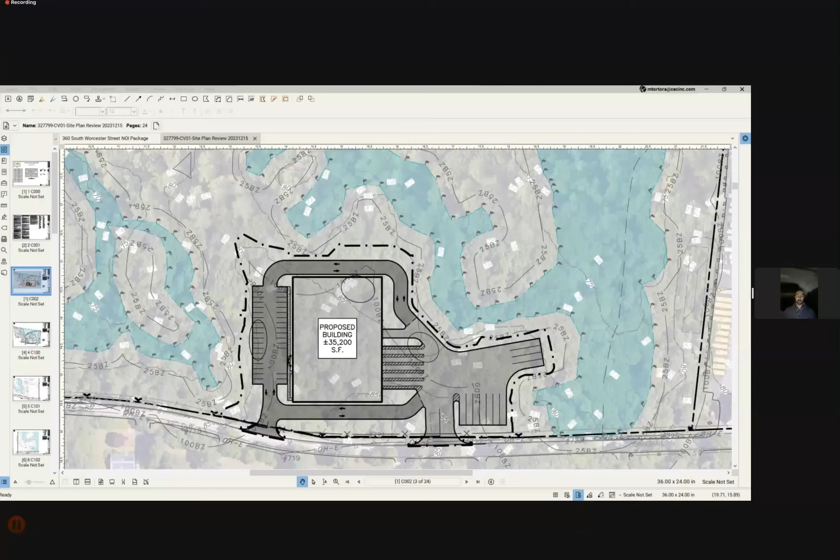The site is predominantly wooded, so there would be clearing associated with the potential development here. We will maintain minimum disturbance to the extent that we can by matching the grades around the edges and introducing retaining walls in some areas to minimize the impacts. So Mike, if we jump to the layout plans, it'll show a little more detail.

So maybe what you were alluding to, Mr. Chairman, earlier was the concept of splitting the project into two. It's really just a left and a right view that we have for each series of drawings to be able to show the detail at an appropriate scale. So again, it's really just one project.

From the western portion of the site, we have access for passenger car parking, which would serve as the front door for employees or visitors. So we have primarily passenger cars at the westerly entry, and we provided a circulation route around the building for fire access. Along some edges we've introduced retaining walls designed to minimize the grades. The parking meets the zoning criteria for number of spaces, and we have loading on the easterly side of the building.

On the easterly side of the building, we have a few loading docks. Along the back side, we have 5 depressed loading docks, and 1 at grade that we'd be able to pull into the building. There's also storage space for trailers as vehicles may not be in use or actively unloaded or loaded, with a wider entry suitable for larger trucks to enter at the east entrance. So the east side of the building is primarily reserved for the warehouse and larger vehicle use, while the west side is for passenger cars.

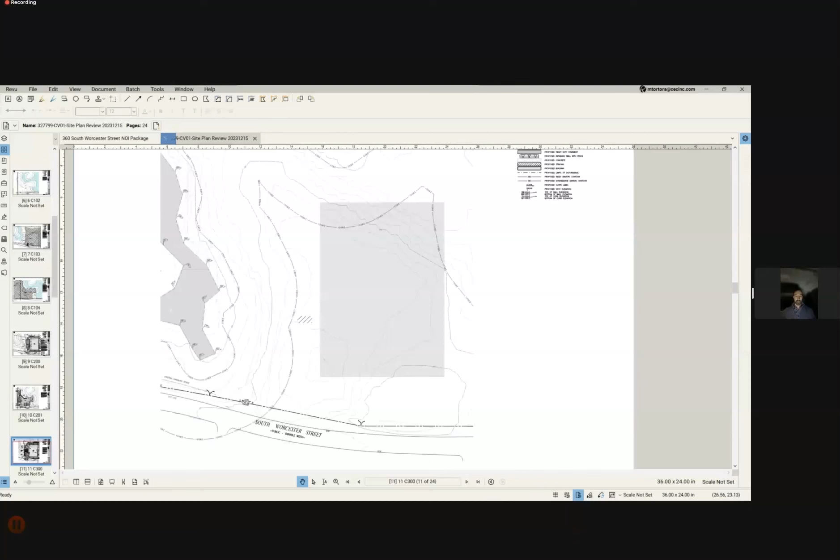This one is the grading and drainage plan. Prior to preparing the plans, we had a pre-meeting with the town, the various departments, as well as some preliminary soil evaluation work. We performed 11 test pits in January of 2023 by a licensed soil evaluator, witnessed by the Board of Health and the conservation agent. Generally, the groundwater was fairly deep, and the soils were very conducive for both septic and stormwater infiltration—it's a sandier material, so it worked well for the stormwater management system design.

What we're proposing is to pick up the pavement areas with deep sump hooded catch basins, route them through water quality units, and then to subsurface stormwater chamber systems where the stormwater will be treated and infiltrated back into the ground. We have one system on the west side of the property and one on the east side as well. The approach was influenced by conversations at the department heads meeting, where it was recommended that subsurface chambers are preferred over open basins to assist with future maintenance, and they perform better in the opinion of the town's conservation agent. We entertained that and approached the design with it in mind.

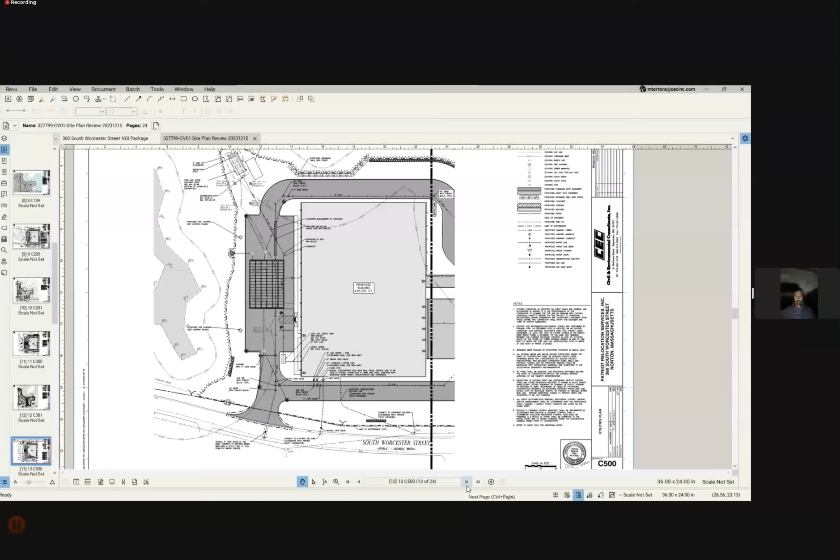Same thing for the utilities here. If we go to the next page, please, for the landscaping. I'll finish on the landscaping here and then open it up to any questions that you may have.

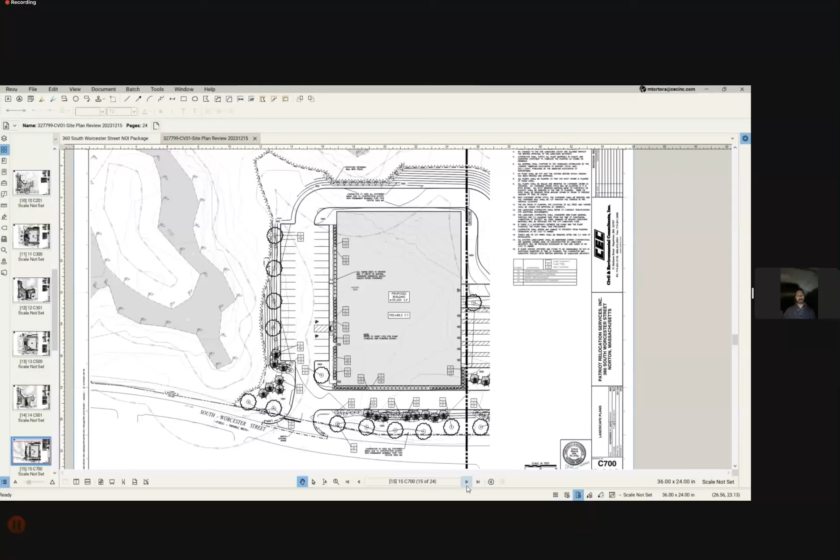The landscaping for the project introduces a fairly dense vegetated buffer along the frontage, so we want to make sure the building is screened from the roadway. We understand the neighborhood and context of where the building is proposed, so we're introducing a mix of evergreen and deciduous trees along the frontage, as well as keeping a robust landscape strip to set the building back and provide a visual buffer from the street. We're also providing landscape screening around the perimeter and within the building to help with curb appeal and additional screening around the parking and loading areas.

If you go to the next page, that'll be the landscape plan for the proposed loading areas. Again, we're introducing a mix of evergreen and deciduous trees to provide year-round visual buffer from the street to the proposed use.

The next page has some lighting plans as well. If you're interested in reviewing those, it's going to meet minimum standards for lighting, for safety and accessibility, through a mix of street lighting, individual poles, and building-mounted lighting around the perimeter, providing a safe environment during evening hours.

We appreciate any comments you may have. We believe we've designed the project to respect the no-disturb buffers, as well as meeting Wetlands Protection Act guidelines. We do have preliminary comments from the conservation agent. I understand that will be part of the process, and we welcome working with the town as we go through the review. Thank you for your time.

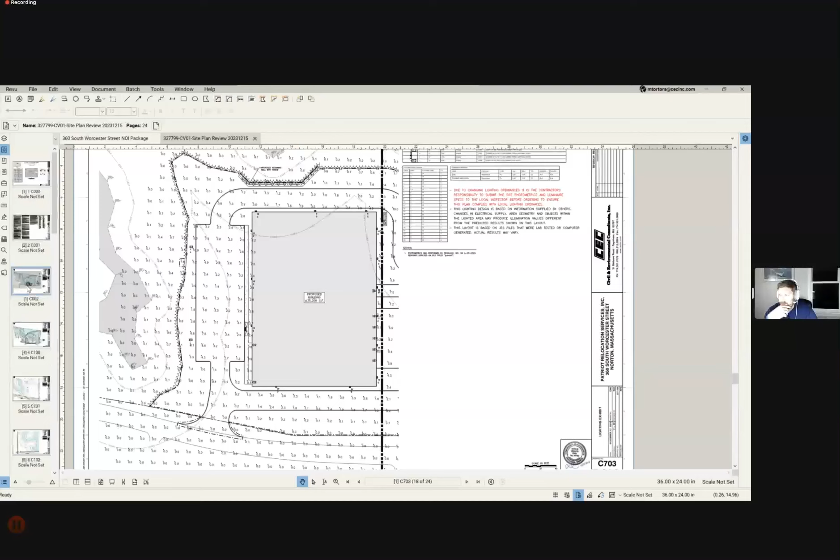Just to add on to that, we have contacted a peer reviewer and contracted with one to do the peer review for the stormwater. That's going to be under conservation. For the general public here this evening for this project, please note that any questions you may have should be in line with environmental, conservation, and stormwater related topics. Any questions on lighting, traffic, screening, and things of that nature dealing with the planning board, we ask that you reserve those for the planning board meeting, which I believe is tomorrow. Thank you.

All right, so conservation member questions? I have a few, Julie.

You can scroll to the top of this plan for the Wading River. So you said it was relocated - where did the information from here come from then if it was relocated? The delineations here are based on a delineation done by the wetlands consultant, about 3 years ago. It was flagged at that time as the former Wading River, so it wasn't identified as having a riverfront. All the FEMA maps and information we have to date appear to indicate that the actual river itself was essentially cut off at the railroad tracks and shifted north of the tracks. So verifying that would be part of the scope the wetland consultant will be doing.

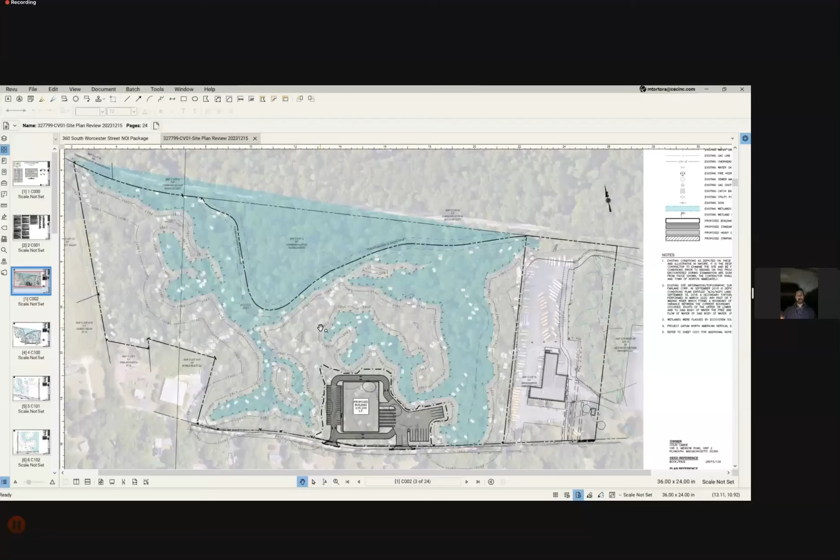So according to FEMA, is there any flood zone mapped on the site? There is, it's a Zone X. There's a Zone A and a floodway that's actually mapped following the railroad tracks north of the tracks. So in the lower portions of the site, it's a Zone X, which is the 500-year floodplain. So there's no 100-year flood zone on the property? There is not, no.

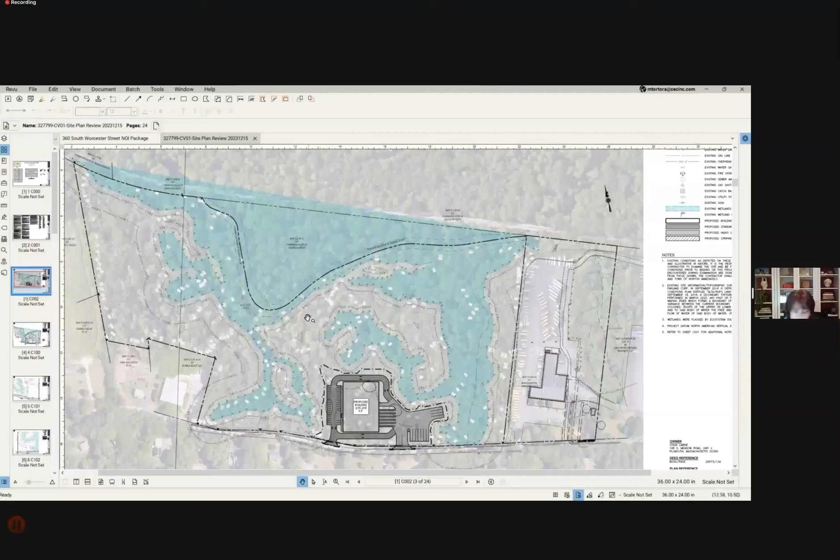So my next question is, if you can go to the grading plan, I could not tell the difference between the grading and where you're going to put those retaining walls. Can you outline where the walls are going and what they're made out of?

Sure, while Mike's highlighting where those walls are, we would typically build those out of a modular block system, Redi-Rock walls, essentially a gravity wall, as they're often referred to. It's essentially just stacked blocks. Sometimes they have a geogrid behind them that keeps them in place. Sometimes the blocks are of sufficient weight that they essentially hold the earth back based on the weight of the blocks.

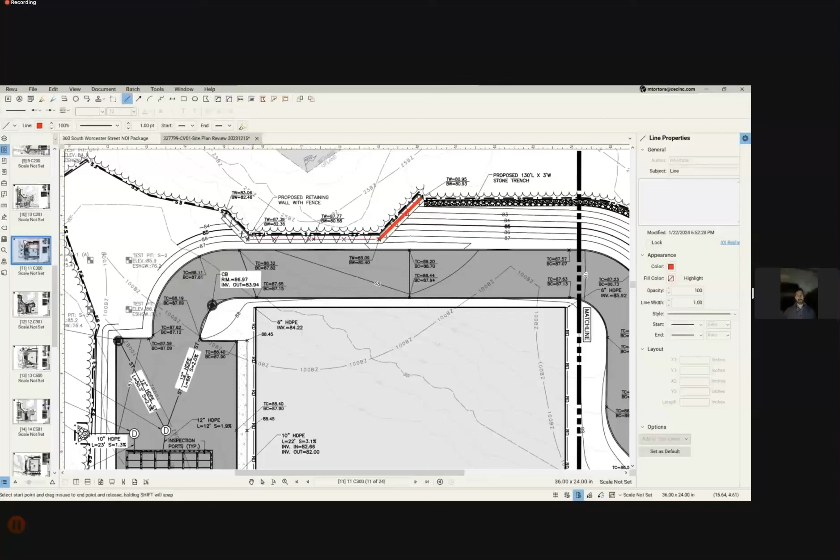So is the top of the wall shown, or is the toe of the wall shown once you get down at that angle, whatever that is, 3-to-1, whatever that wall block is? Are you showing that true to scale so we can tell? Do you need room behind the wall to construct it? Do you need access back there, a work zone behind it?

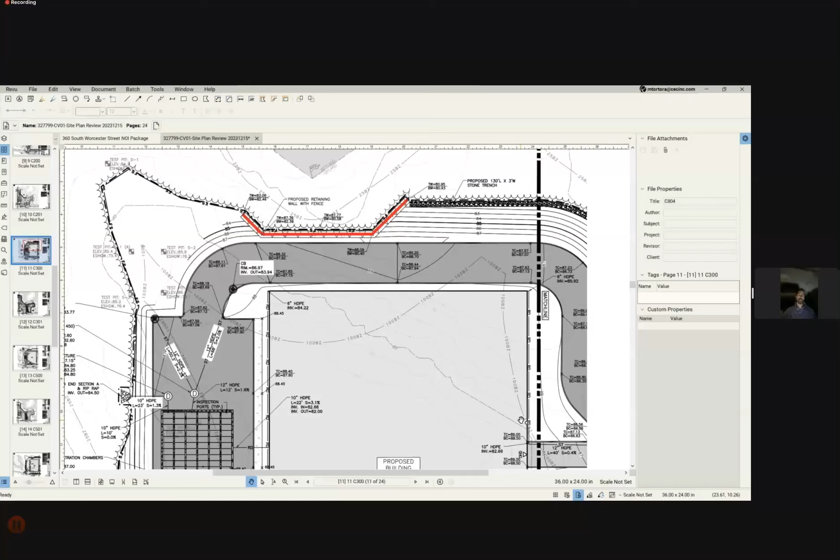Yeah, that's a fair question. We show the walls with a thickness that represents the actual size of the blocks. So we show the toe of the wall, and draw it with a thickness that represents generally what we believe the blocks will be based on the information we have. In this case, around the perimeter of the site, it's all lower than the site, so you would build up from the toe, so you don't have to extend past that toe to build it back or have any temporary excavations. So the front edge of the wall really represents the limit of disturbance for the project, because you just stack them up and fill in behind the wall as you're building it.

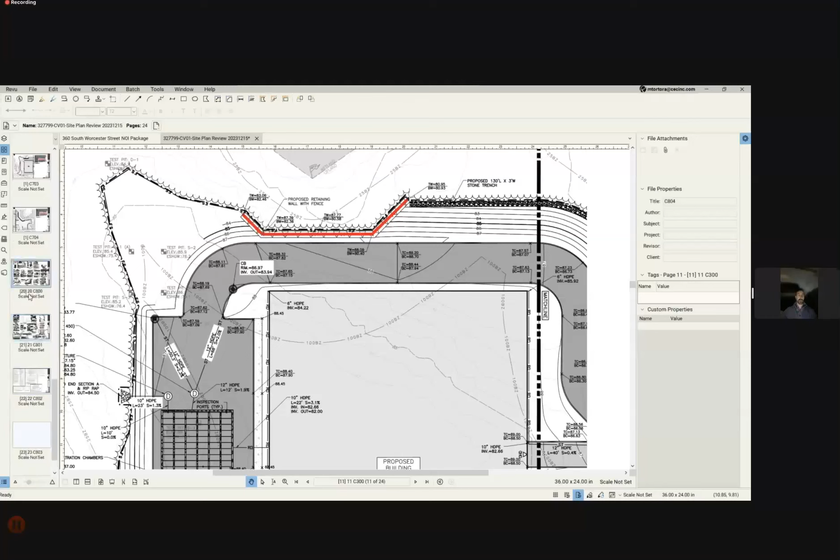Is there a detail of that wall? There is, yep. Mike, if you jump to that page, you could show the detail quickly. So is this the only segment of wall? No, there's I think maybe 3 portions of the site that have a retaining wall. All right, let's look at the detail first and then go back to the plan view and take a peek at where that wall is.

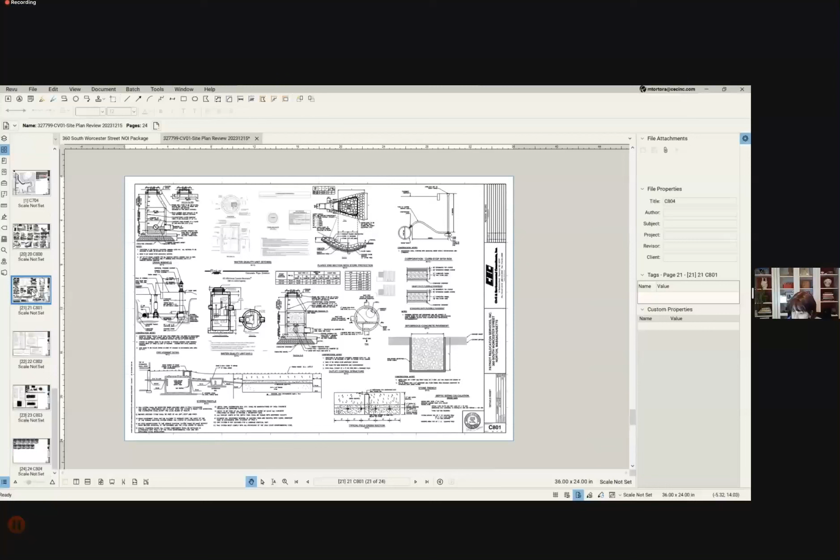If you're not seeing that detail, Mike, we'll make sure to add that to the plans if it's not in there currently. I'm not going to know how to build it if you don't have a detail.

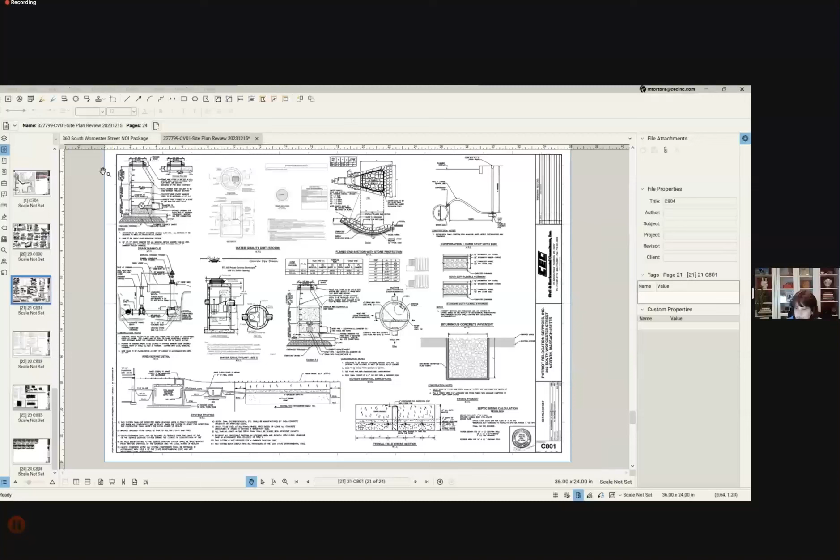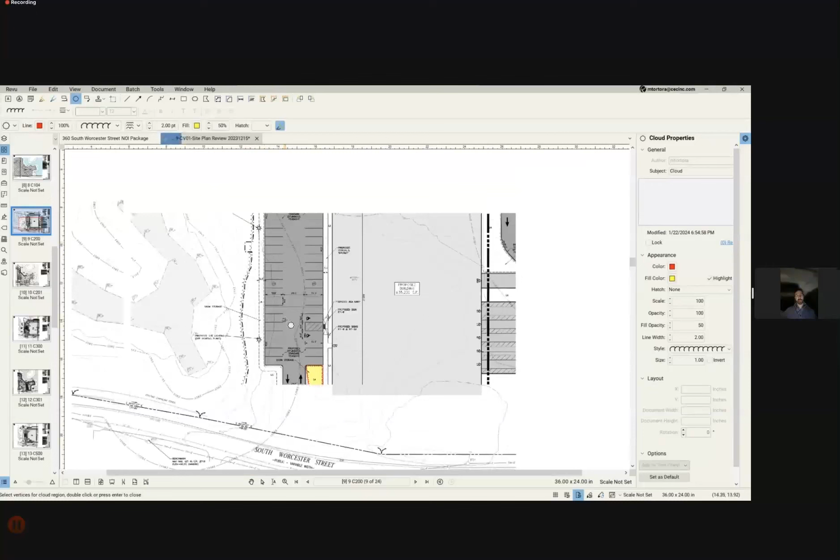The next question I had on the grading and drainage plan is where your snow storage areas are going to be. Sure, I believe we show that on the layout plans. So we do have perimeter snow storage areas identified on the plans, along the edges, so it wouldn't impact the available parking or the circulation for fire access or for the loading for the site. So we do have some snow storage areas identified on the plans.

Okay, and on the other side of the trucks, do they, is that going to be enough space considering the length of that plow run? Yeah, it ultimately can be. It's really dependent on how it's being managed, and there's also space on the pavement. Should we not want to plow and clear the entire paved area, I think there's enough space on the site to have some of that storage area within the pavement also available for snow storage if we need to.

Okay, I see the remainder of the wall is on this side. Okay, yep. And then where do you have any dumpsters outside? We do not. That's a good point. We'll certainly work in the storage within the site. They wouldn't be a large user, so we'll find a space for external dumpsters. Those would be fully enclosed and screened, so we'll add that to the plan set. Thank you.

That's all, thank you.

So you're saying that the usage of this building is strictly manufactured goods and then redistribution, there's no manufacturing that's going to happen here? Correct, we're not proposing that as it is today. The original use intended by the applicant, he owns a moving company, so the idea would be to have a temporary place to store some of that material they have from the moving. So no manufacturing, no processing, it's really just a warehouse use.

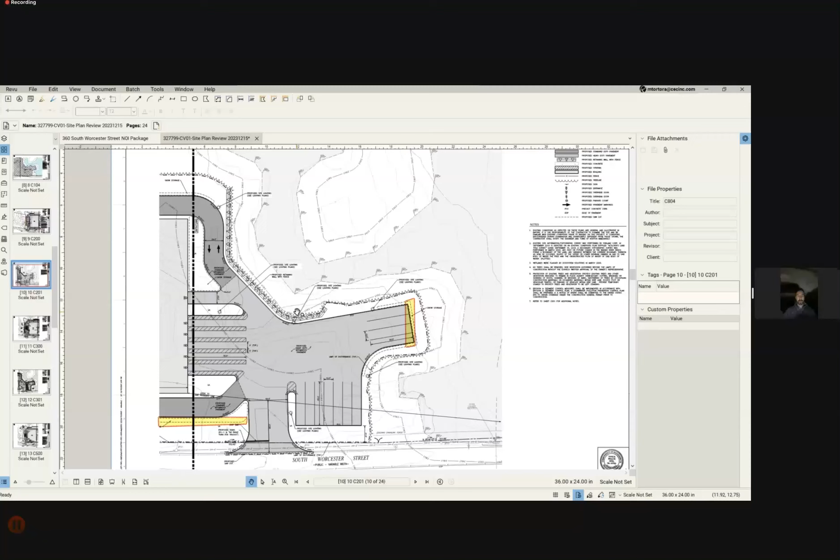If we don't have anyone on the commission - Julian, I just had one quick question. Just hoping you could clarify something you said at the beginning. I understand there was a request to have a couple of the flags redone. I think I read on the plans that the original flagging was done in March of 2020. Is that correct? To be honest, because I'm not at my desk right now, I don't have the dates in front of me.

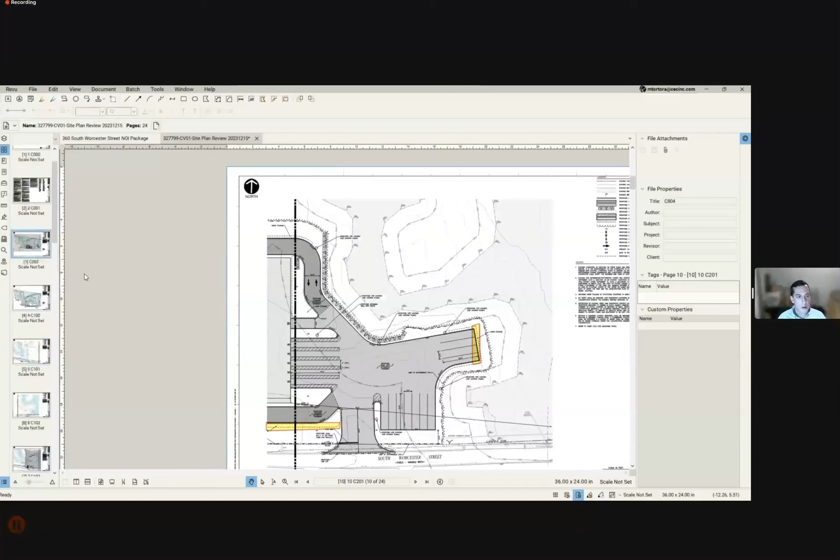Okay, someone can correct me if I'm wrong, but I believe I read that somewhere. And then I was hoping you could draw our attention to which of the flags were going to be redone. I'm assuming it's not all of them. Yeah, that was kind of my thought process - to just refresh the flags within the project work area. Because refreshing all of them for the whole entire site is going to be an extensive task, especially this time of year. So they can show those areas as approximate, but just refresh the flags within proximity to the work area. This is only a notice of intent, not an ANRAD, so they're not trying to confirm the resource areas on the whole site, just within proximity to their project. Gotcha, yep, thanks.

All right, I think we can potentially open questions up to anyone on the meeting who wants to ask a question about the project. You can do that either by introducing yourself or raising a hand by going to the reactions button. But if we don't have any questions, there's still a lot more information to come forth.

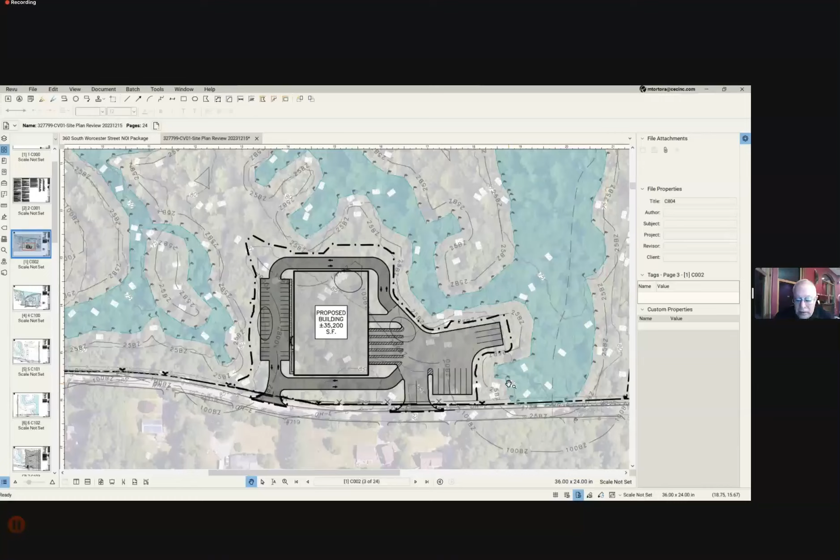Particularly with the stormwater review that is still pending, this would need to come up for a continuation, and our next meeting is February 12th. So we can consider a motion for continuation unless there's something more we need to detail tonight.

I'll make that motion. Second. So we have a motion made by Tama and seconded by Lisa for continuation of this hearing until February 12th, and we'll have some more information at that time.

So again, roll call vote. We'll begin with Lisa and Paxton. Aye. Lisa, I didn't hear your audible, but it looked like you said aye. Sorry, yeah, aye. Okay, and then we have Mark and Tama, aye. And Dan, aye. And I'll throw in an aye, so the motion carries.

So we'll see you guys in February.

Before you leave, may I just ask a quick question? I know Redi-Rock is a specific kind of gravity wall. Do you have any others in mind, or just gravity wall generally? Just gravity wall - we're not beholden to any one particular manufacturer, so we're open to the best manufacturer, the best material for the proposed use. Okay, thank you. Yep, that's all.

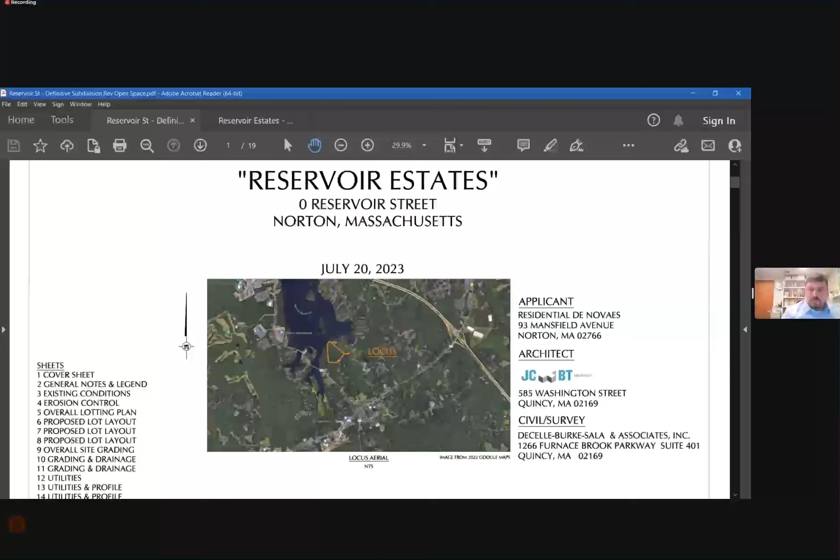So here's the existing site at Zero Reservoir Street, map 9, parcel 223. There's no development on it at the moment, so it has no real address. It has 588 feet of frontage along Reservoir at the front, and about 320 feet of frontage on the Norton Reservoir at the rear. It's relatively flat in the front portion of the site, and it creeps up to a knob of ledge and then starts to slope back down to the reservoir at the rear.

There's some passive walking trails on the site. It's a young forest. There's about 1.8 acres of wetlands, bordering vegetated wetland on the west side, a potential vernal pool that slightly clips onto the site, and then a bordering vegetated wetland at the rear along the Norton Reservoir, and another wetland at the front right of the site to the east.

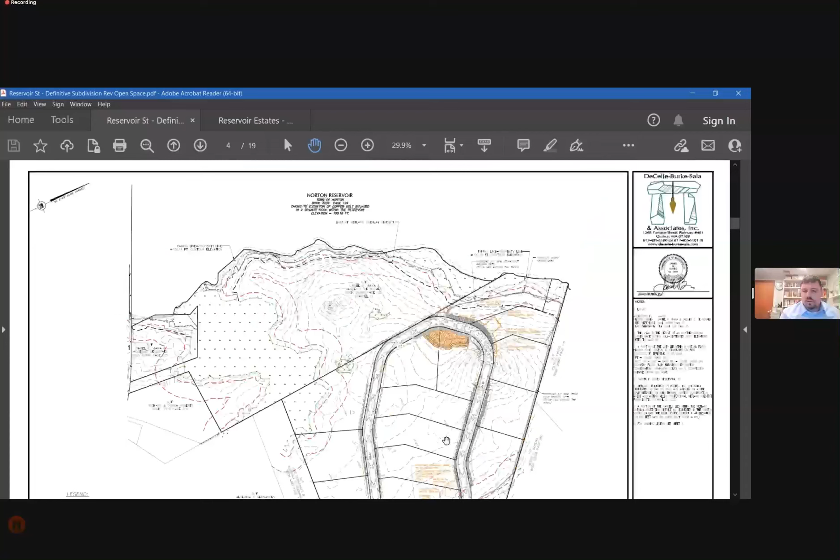As Ned said, we were approved for a 14-lot subdivision through the Norton Planning Board, and we're looking to permit the construction of the roadway for this subdivision. I can get in.

So here's the grading. There's two entrances on Reservoir Street, and it loops around the site. It's about 2,600 feet of roadway, 26-foot wide pavement with 5-foot sidewalks on either side, and the grading is made to match the site as best possible, and then it slopes off the edges to meet back up with the lots at a 3-to-1 slope.

We have this portion which crosses into the 100-foot buffer at the front right of the site. As you can see, I can zoom in. This dark black line that comes through here is a retaining wall to keep the grading from encroaching onto the 25-foot buffer. And this light gray line is the proposed public easement walking path that we have with the conservation restriction that we presented a little while ago.

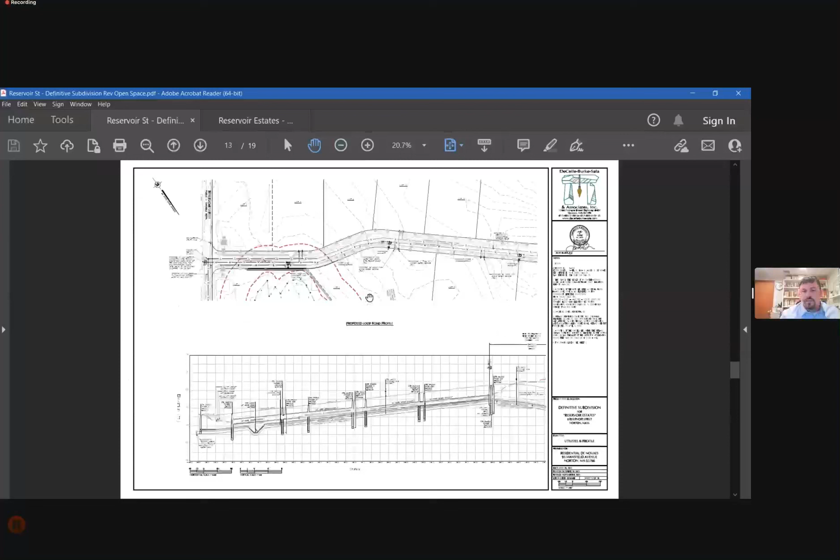Zoom out. I have a bunch of views of the new utilities. Essentially, there's going to be a new 8-inch water line looped through the road, a 2-inch force line sewer. All of the lots will have their own small grinder pump that'll pump into the force line sewer that'll meet a gravity line in Reservoir Street.

We're currently working with the Norton Water and Sewer Commission on permitting; we have to bring a sewer line 1,300 feet up Reservoir Street. It is a gravity line, and they're currently peer reviewing the work also. There will be electric line throughout, street trees placed every 40 or so feet, and light poles placed, I believe every couple hundred feet, and they're dark sky compliant light poles.

So the majority of the wetland disturbance, buffer zone disturbance, is at the front right of the site where the roadway crosses through the 100-foot buffer, and there's a retaining wall that keeps it from going into the 25. And then at the rear, there's some minor grading into the 100-foot buffer for the reservoir.

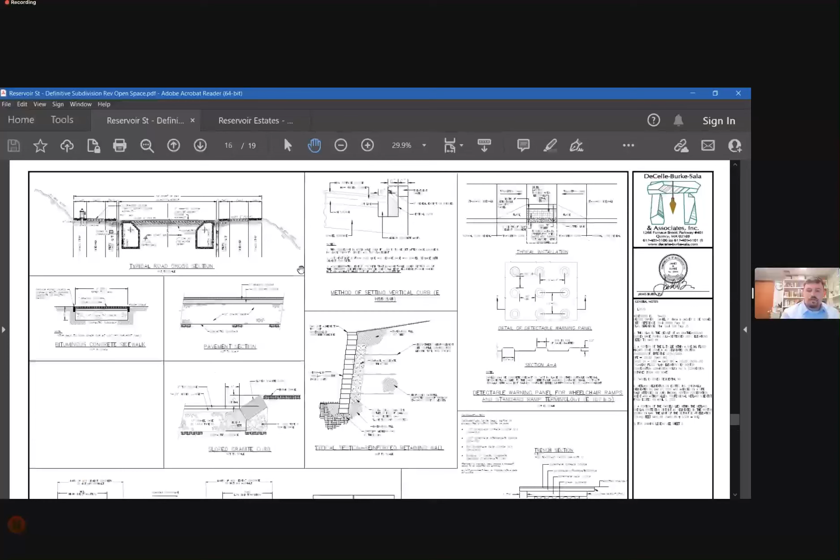There's also a wetland here, and the grading for the roadway does not encroach into this area. We're outside of the 100-foot buffer. If it were a certified vernal pool, we'd try to remain outside the 100-foot with any disturbance.

And at that, I'd like to open it up to the commission for any questions.

Yeah, I need some clarification. Maybe you can help me with this, John. Right now the stormwater is being reviewed with regard to the drainage from the road. That's the limit of it now, is that correct? From the road that they're proposing, the loop road that they're proposing?

Correct. And part two of the question is, will the impervious surface associated with the houses and the driveways of the houses also have to meet stormwater standards? Yes, that's part of it.

So for instance, right now, it's a two-phase project as I look at it: the road is coming in, so they've got the stormwater permit, which they're getting basically through this notice of intent for the roadway. But then each lot, depending on the size and scale of it, will need to meet the stormwater provisions. Since it's a 14-lot subdivision, the whole thing is going to have to have its own separate stormwater permit under our local regs.

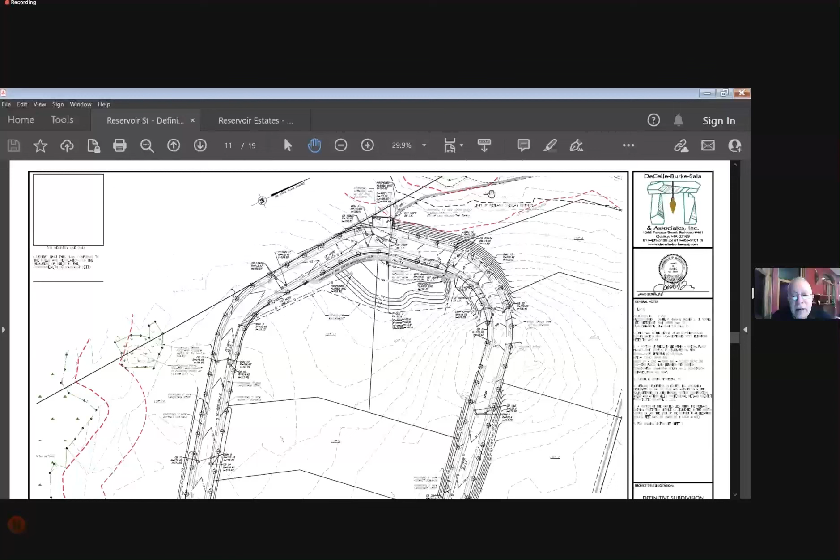Let me ask, where is that release going to occur? Can you show me on the plan? There's one for the rear detention right here. Okay, and where does it go? It'll flow overland to Norton Reservoir. All right, but I'm more concerned about your structure in the front.

Zoom in on it. Yeah, the last thing we want is to flood out Reservoir Street, or a neighbor. So I'd say keep any sort of excess flows away from Reservoir Street or any neighbors to the east and west. This gets culverted to the bordering vegetated wetland here, and with the study we've done, it decreases the peak flow that goes to it now.

Right, but you're saying these soils can't absorb any additional water. So what I'm seeing is, how much water are you collecting from the whole site, directing it to this front system, which is then going to release in total more water into that bordering vegetated wetland, whose property and house is directly adjacent to that? Do your studies show that there's no possible increase in the water level in that wetland from this kind of a plan?

The study shows that we decrease the flow into the wetland. The whole front of that site flows to that wetland now. And this is why we're constructing what will essentially be a new wetland at the front of the site that slows down the flows before it gets released to the other wetland. That's to compensate for the additional impervious surface on the site, and the overland flow. But that wetland goes off-site, is that correct? It extends off-site, yes.

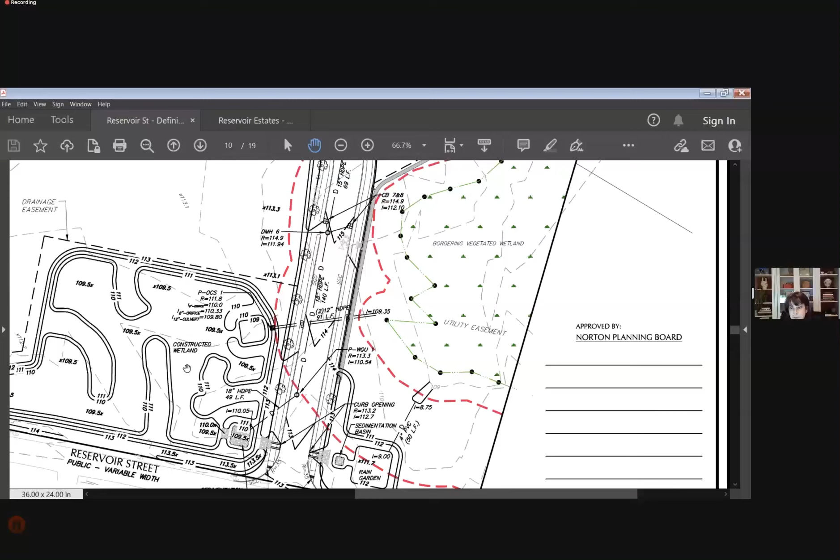Yeah, it's conservative. Okay, but it also leads me to think that those people building houses are probably going to have to bring in fill for every one of those houses, so that their yards—they don't all have sump pumps and French drains, and they don't have skating rinks in their yards. If you're saying there's not going to be any infiltration, but you're leaving it up to each individual house lot to infiltrate, you're kind of saying two different things there, right?

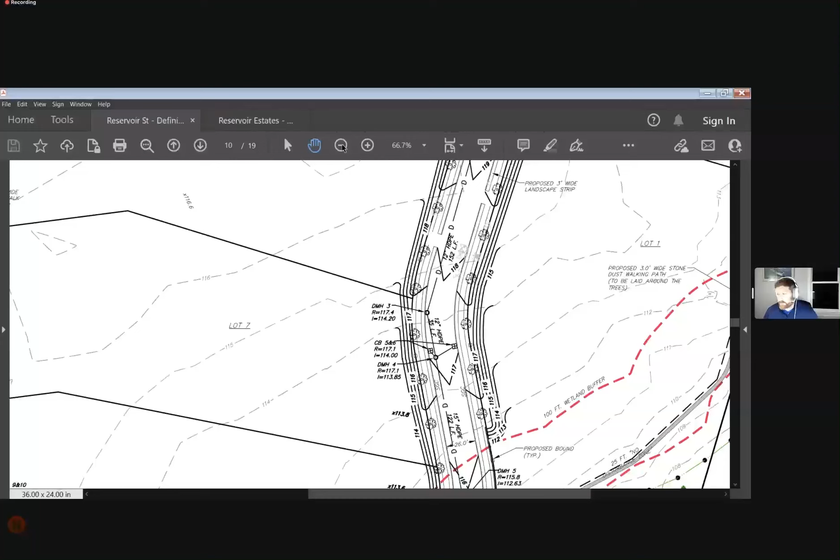I'm not leaving it up to infiltrate, more to detain on their own site and release. How can they, if the soils aren't conducive to that? You'd have to bring in fill to each individual lot then, right? Well, if you were to infiltrate, yes, but to detain, you don't need conducive soils to detain water. So far, most of the houses that have been built on Reservoir Street to date, since my tenure here, have been raised up.

So along in this area, all the houses that are going to be built on this site are probably going to have to be raised up, except for the ones that might be built on that knoll where that historic fireplace is. The other issue is where you're going to find ledge with the foundation and stuff like that, that's going to have to be investigated.

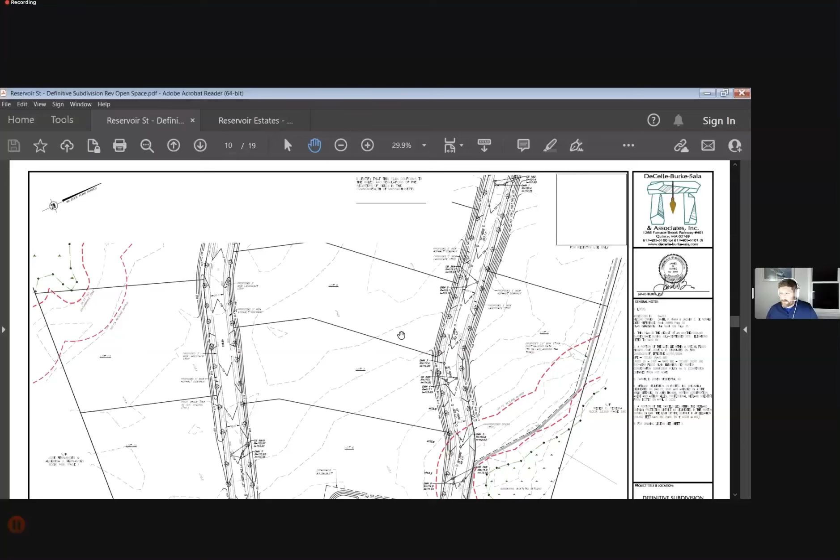My biggest concern with a lot of this stuff is the amount of volume and the amount of potential runoff that's going to be generated from the final product. That's how it should be looked at, because that wetland system created down by Reservoir Street, if that overflows, it goes onto Reservoir Street.

So that's the concern I have. If that pipe gets clogged, or anything happens, that wetland's just going to overflow onto Reservoir Street, and we're going to have to call highway, and it's going to be a maintenance nightmare. There's about 4 to 5 feet of difference between the bottom of the wetland and the top to Reservoir Street.

So the biggest challenge is just making sure that whatever water is being generated on site is able to be infiltrated on site in a short amount of time. For instance, if the soils are rank D class, obviously those infiltration rates are poor. You just got to basically do the calcs and numbers to see how much water and quantification you're going to get, and then be conservative about it.

I think once that works to your benefit, the wetland might need to be expanded, I don't know what you're creating. I'm just saying I'd rather you be on the safe side rather than the sorry side, because I don't want to have to go out here to the HOA or whoever, and then have to come back and fix this whole situation two years down the road.

Each of these detention systems is built in with a foot of freeboard. So they're designed right now so the height of water is a foot below the top of the system as designed.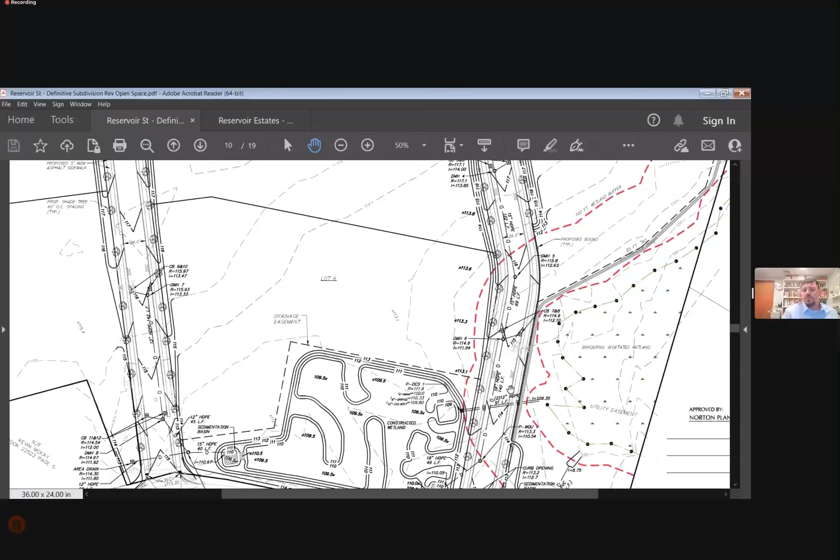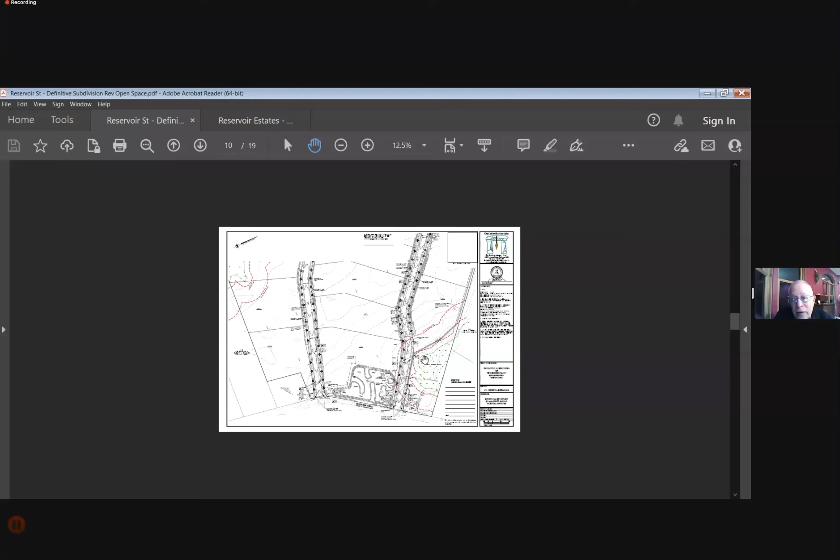Where is the nearest abutter, as it's being displayed, to the right of your project? The nearest would be here. Well, I understand, but the wetland system that you're dumping your detention basin into, the abutter to that wetland system would be my primary concern. If it's a long way out, fine, but I don't know that area well enough to tell you who lives there next door.

There's a house back here. Yeah, that's a long way out, that one. But I don't know these other two lots, I don't have the exact distance from here to here. I can put on an approximate based on GIS for the next renditions of plans. I'm not sure exactly where this house is.

I think you understand what we're saying - your overflow is into a wetland. The question is, who's adjacent on the other side of that wetland, and are they going to be impacted by your design here? You have two lots - the one in the back is less of a concern because there's more breakout to the reservoir. But these two lots, I think you have to really demonstrate that you're not going to adversely affect those people.

There's four lots across Reservoir Street that are residential directly - they don't show it on these plans because it's not the project site, but there's, looks like four addresses: 41 Reservoir, 47 Reservoir, 43 Reservoir, and 53 Reservoir directly across the street.

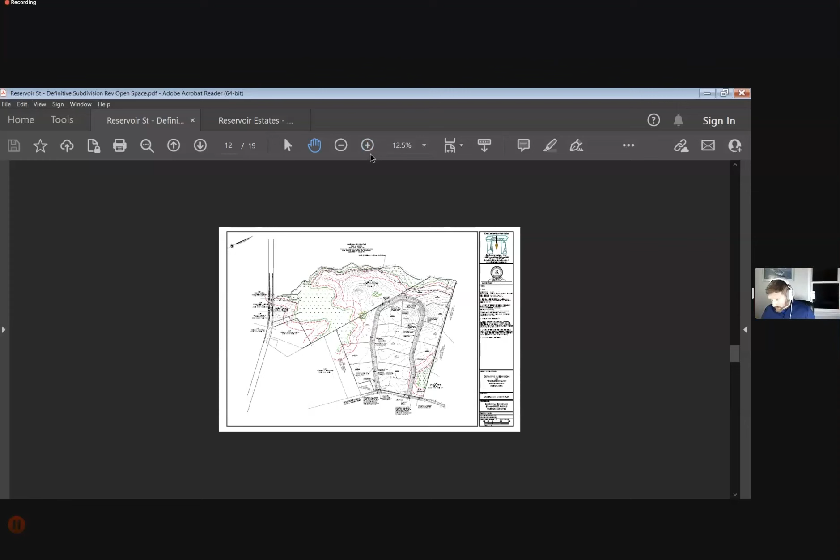So, just for recap, we did have some new construction on Reservoir Street where we had similar flooding issues because of kind of the same thing we're talking about here. So that's why I'm bringing it up. I just don't want that to be an issue for this area, this general vicinity, and have it be an issue for the other neighbors as well.

So the systems are designed to handle 8 inches of rain over a 24-hour period. The 3 to 4 inches that we've gotten, that's about a 10-year storm. They're designed to handle the 100-year storm. The piping in the streets is designed to handle the 25-year storm. That's typical engineering practice, and we have pipe sizing calculations to prove that those can handle it.

So to overflow these systems, you'd have to have greater than 8 inches of rain in 24 hours, or back-to-back events, right? So if you have a 3-inch storm, then a 4-inch storm close to it. They're made to drain within 3 days. That's the standard.

So if you get 8 inches of rain 2 days in a row, which is very uncommon. Or let's say we had a foot and a half of snow and then we had 60-degree weather the next day and it all melts. Obviously it's different how you calculate the amount of snow melt, but that also compounds on a potential rain event that you potentially have at the same time.

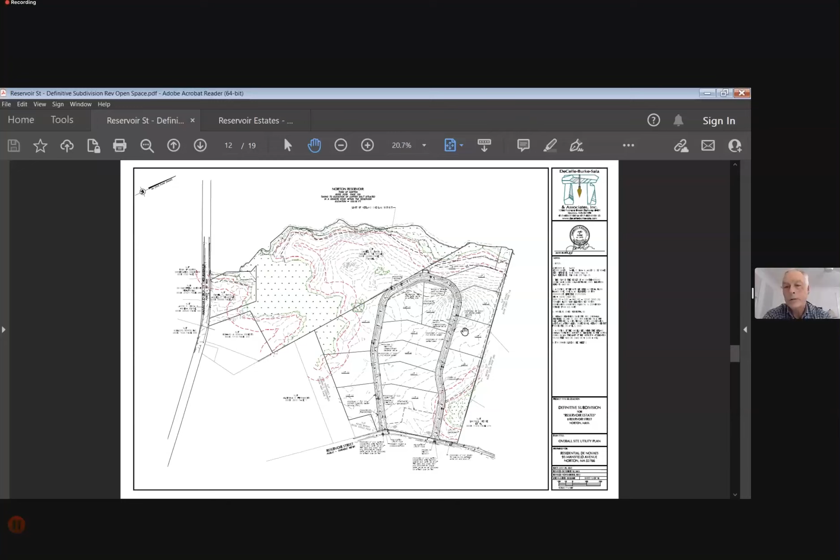And what's the volume, the change in volume, if any, associated with what's flowing into that wetland today, as opposed to what would be flowing in from one of these storm events from the man-made wetland. In each case, we need to demonstrate that we're being conservative in our approach and solving as much as we can for the worst case scenario.

No, I would say we're not talking about separate things. We're talking about different variations of the same thing. And the question is, so John is concerned that it will not only break out and go onto Reservoir Street, but will flow across Reservoir Street into adjacent neighbors. And I am concerned that it will.

I see. I don't know where that wetland that just sort of goes off the plan, what the extent of it is, and where it drains to. Does it have an unobstructed path getting to Norton Reservoir? In which case, I would be less concerned.

But the underlying issue is the commission is quite familiar with the entire area, particularly with review of adjacent projects, that there's no drainage there. It goes over land until eventually any water that collects on it drains away. And I think in a different area where there is potential drainage, we would be less concerned.

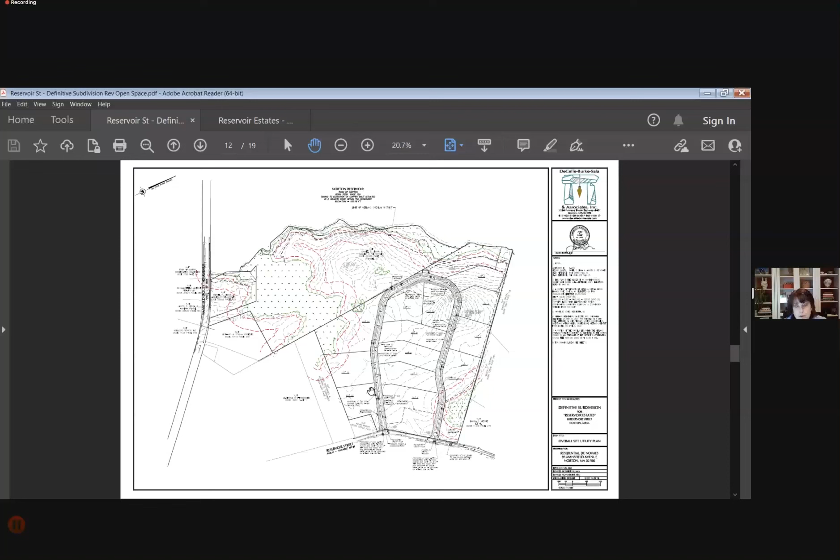Yeah, go ahead. Can you go to the plan that shows the temporary stormwater basin, or construction term basin? It's the construction management plan. This one? I think that was it, yeah.

So in that back corner around that curve, it looks like you have about 7 feet of fill for the road. So you're showing a temporary sediment basin, but effectively you're going to wall that whole contributing area off when you build the road. So is your diversion swale going to be just from the east, or the right-hand side of the road, correct?

Because when a road gets constructed, it'll pitch back towards catch basins that are supposed to be there.

We're not talking about construction term though. You can install catch basins early in construction and just put sediment control in them and have them directed to the sedimentation basin. But no, you actually don't want to rely on that, depending on what's exposed.

So now you're going to do each house separately. So now we're going to have to track, when you're building each house, what sediment control devices they're going to use in those catch basins, because you don't want to, for instance, if you're clearing 20,000 square feet for a house and exposing all that soil, you don't want that to go into your catch basins.

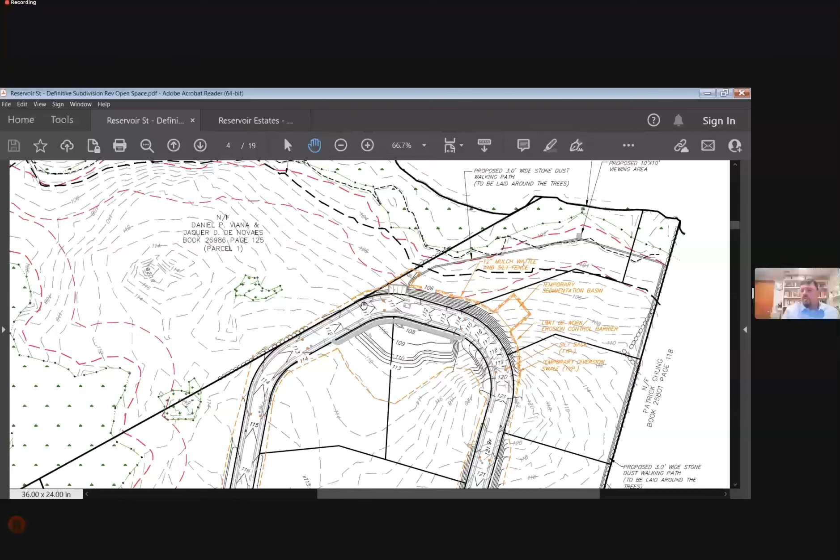Right, but you cannot leave the sizing of this basin up to the contractor. No, it won't be left up to the contractor. We'll produce a construction set of drawings. Well, I guess I'm asking you to advance this one piece of the construction set so we can be assured that basin is sized correctly. That should show up on these plans. Write out the detail as well for the EPA CGP, please.

And then you just have a wattle surrounding that toe of slope? No, 12-inch wattle and silt fence together. Okay, can you go to your detail on those controls for a second?

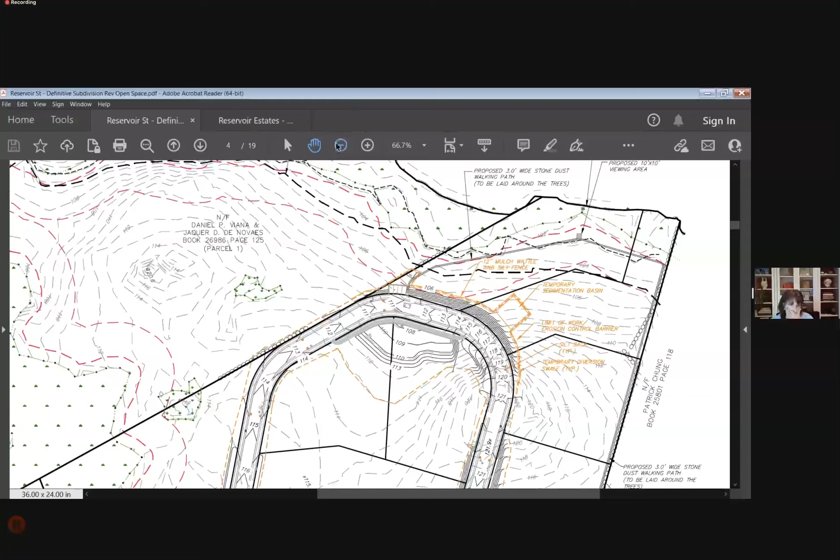So yeah, we definitely need to see how that basin is sized. Okay, where am I here. Okay, so your wattle detail - we no longer put the stakes through the wattles themselves because the wattle becomes compromised immediately. So you want to just bolster it on either side at a 45-degree angle.

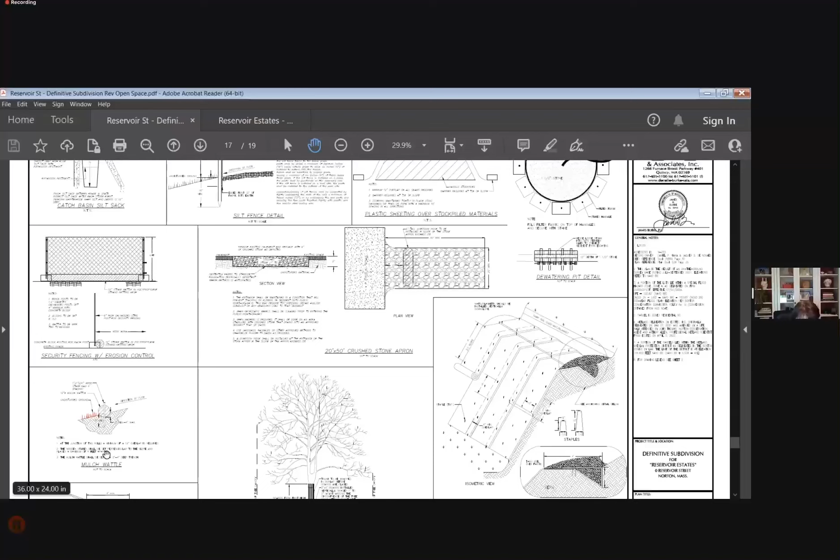And the crushed stone exit, I did not see a stone size on that. It is, I believe it's on it, could be in the notes. It says 1 inch, 2, and then I couldn't read it. And 1 inch is way too small. Yeah, it looks like it got deleted out. I can adjust that. But what size stone would you prefer? Your stone size should be 3 to 5 inches. 1 inch does not shake sediment off of the tire, because you end up grinding it in immediately.

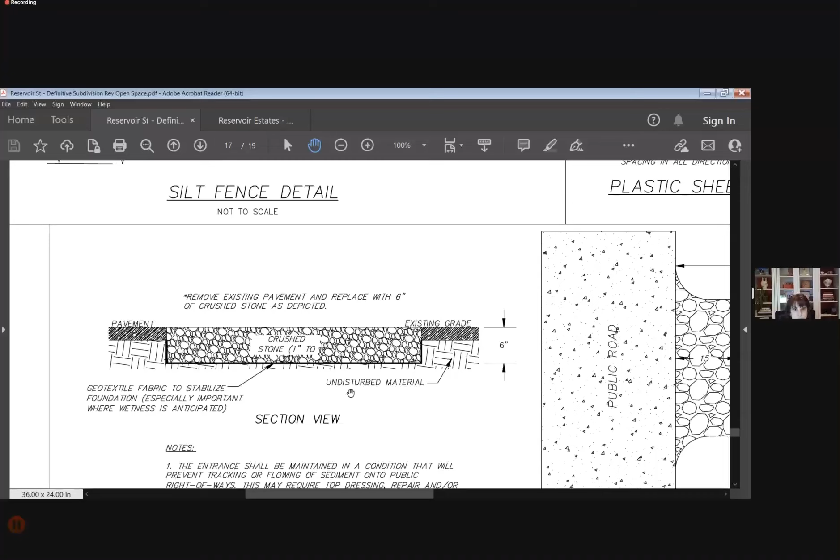And then I want you to also note somewhere in here - we've had this over and over - every contractor puts it in once and thinks they're done, and they're not. They need to refresh it, they need to backblade it, they need to replace the stone at times when it becomes clogged, because we've seen a tremendous amount of tracking. So if you see note 1 on the details, and we also have a detailed erosion and sedimentation control plan that was part of the report that has it also in it. Okay.

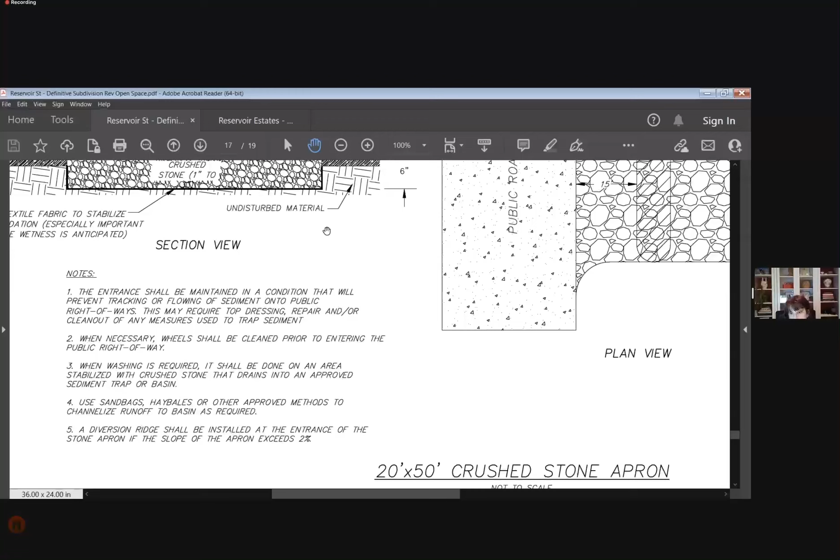You need to strike the word hay bale from all your details. Hay bales aren't allowed anymore for EPA, so you have it in note 4 here. And if you also go to your dewatering basin pit detail, which I assume you're going to need a few around the site, there's a reference to hay bales. We do not allow hay bales, nor does EPA. So yeah, those can be replaced with the mulch wattle.

Oh, with the what? With the mulch wattle instead of the hay bale. Okay, or straw bale. Don't allow the hay because of invasive species. I would just do a find and replace with hay and just replace it with straw - it's easier that way. Keep all the details.

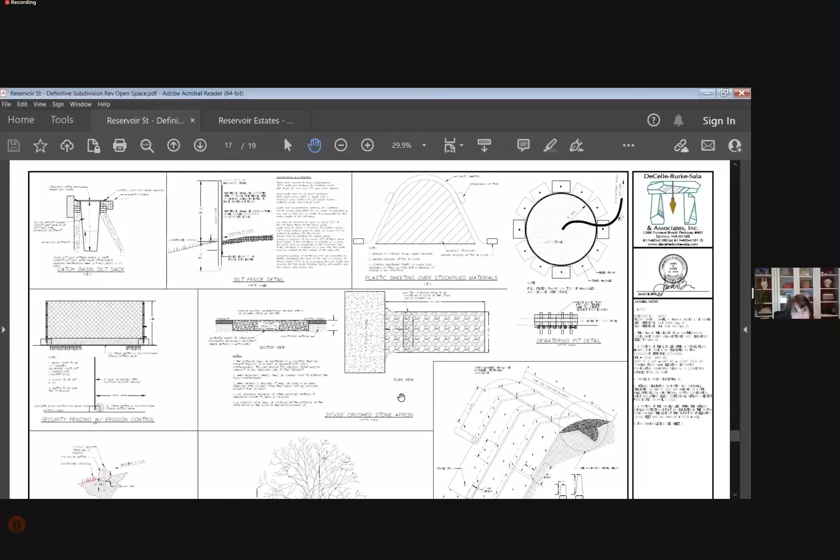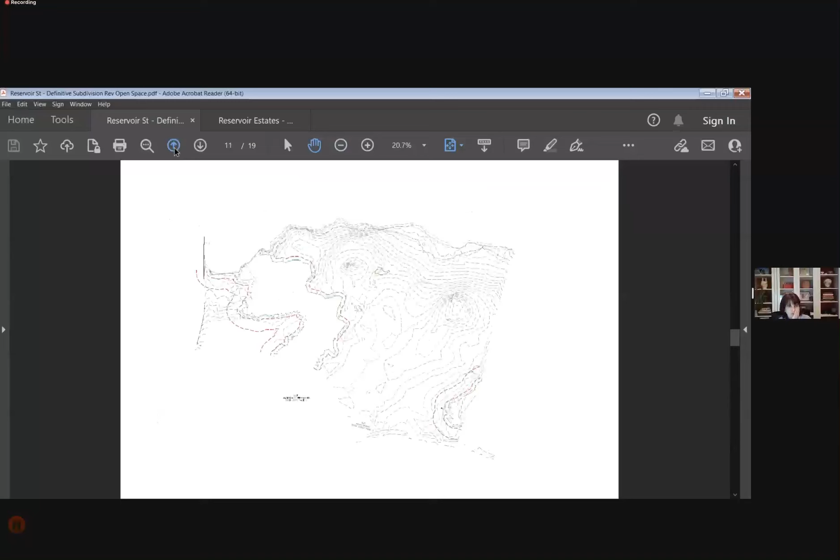And then temporary seeding notes, we'll expect to see somewhere else on this plan, as maybe not this plan - well, look, this does have side slope grading on the road. So if it's not on your SWPPP already... I believe, I want to say I have something with temporary seeding on this plan.

My computer's freezing up - here we go. So I have some detailed erosion and sedimentation control notes on the second page. I don't know exactly where it is in those notes, but we also have the erosion and sedimentation control plan, which I can add a more detailed seeding plan if requested. We definitely need them on one set - whatever set we approve, so we can approve it for the record.

So right here in note 3 and 4... seems to be okay, thank you.

All right, and then you said this was going to be private and not public, correct? We will be looking to have it accepted. It's designed to meet the planning board requirements and DPW requirements. We're going to have an HOA prior to it being accepted, and they'll be looking to have it accepted. If it doesn't, then it stays in the HOA and the HOA is responsible.

Okay, thank you. So any further questions from commission members? I don't see other people in the meeting with hands up, but any abutters or anyone in the meeting, now's the time for questions if you have any.

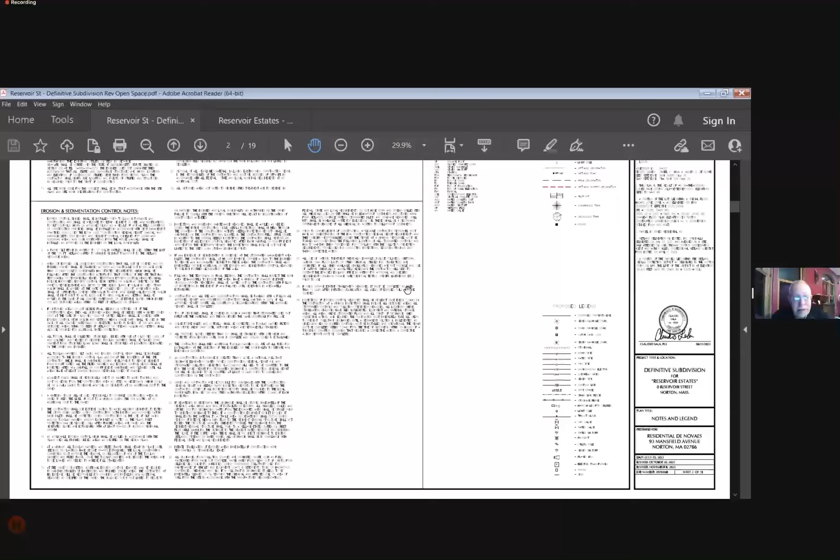This is a problem project in my estimation, because of the proximity of neighbors that can be impacted by a defective design, and the fact that I'm personally aware of how much of that area is underlain closely by ledge, which really limits the amount of water that can be accommodated. So we have to be sure—that's primarily our job, to be sure that when development happens, neighbors don't get adversely affected with runoff. Right now, I haven't seen enough information to convince me that this won't do that. So that's a personal concern, and as a representative of the town as well.

So we've got a lot more to hear about from this project. The next meeting of the commission is the 12th of February, or we can continue it beyond that. What's your preference? It relates to when the peer review will be done, because there's no point having another meeting before the peer review is in. So it's when we get the peer response from the peer reviewer.

Well, the meetings we have lined up are the 12th of February, 26th of February, the 11th of March, and 25th of March. I'd say we'll go for the 26th of February. I think that'll give the peer reviewer time, and us time to review their work and respond, and also to respond to the comments that we heard tonight.

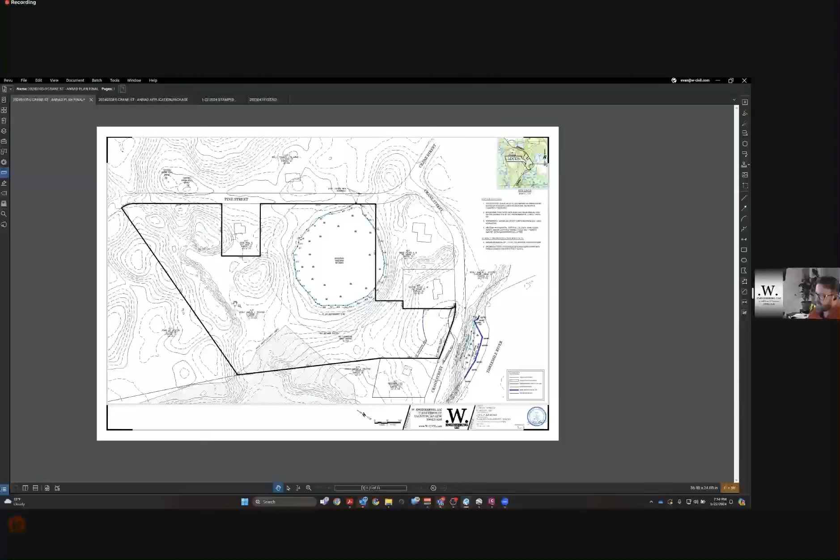It's owned by the Riley Mealy family, and Longbill Homes is looking to purchase the property and develop it. So we had Brian Madden from LEC go out and delineate the wetlands. I show the topography here on the site, and you can see it's all pit and mound in here. There was an earth removal operation done in the past, and that's because all the soils are really great—they're really sandy, Windsor soils. I've done test pits throughout the site, and that confirms it. They're all nice, deep, sandy soils.

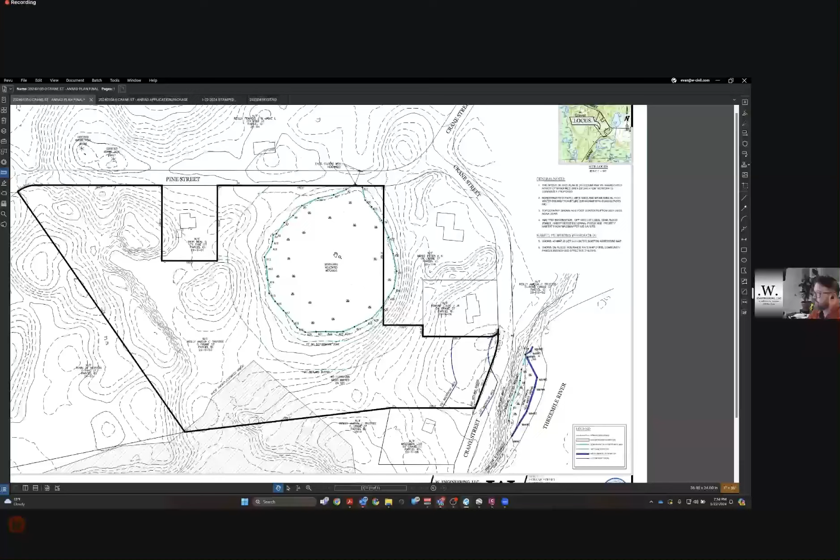So the wetland resource areas we have on the site are shown by the A series of flags—zoom in here. At first it looks like an isolated wetland, just this hole in the site where everything on the property flows into. But there is a culvert here that connects it across the street, so this would be a BVW, and as such we get a 100-foot buffer zone.

The other resource area that we delineated was the edge of the Threemile River with the mean annual high water line here. There is an associated floodplain, but it's not on the site—it's just along the edge of the river. And then there is an associated BVW with that as well, so we'll have a 100-foot wetland buffer, and then the 200-foot riverfront area that comes onto the property here. Across the street there are 2 certified vernal pools, and those are off the property.

So I don't know if anybody from the commission or your consultant has visited the site yet and taken a chance to review the line. But if not, we would be asking for the line to be reviewed and to answer any other questions that you might have.

Yeah, I took a walk out there last week. Obviously, there was snow cover on the ground. I'd like to see what the conditions are with the upcoming rainstorm. But since there's no number for this project, I think we can wait two weeks. But at the same point, it is the winter, so. Based on my field evaluation for winter time, I had no issues with the flags as they're currently shown. But I'd like to go out there again and see what the scenario is under a storm.

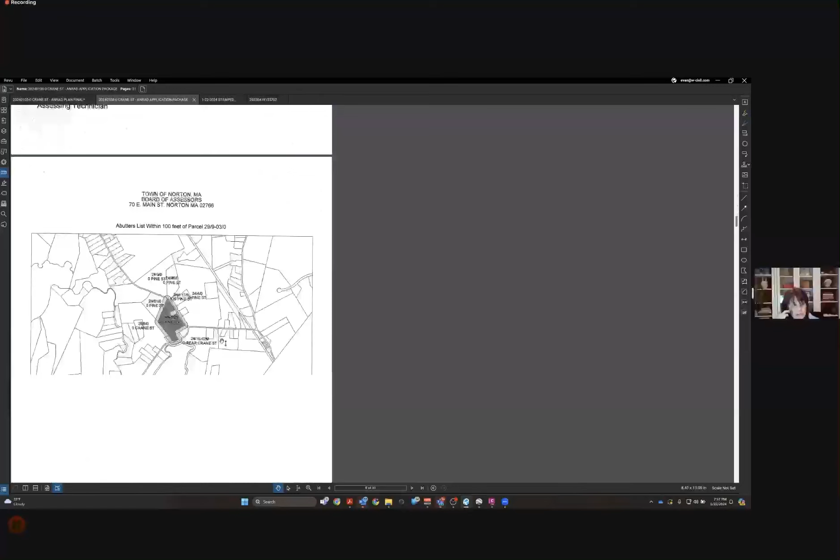So if I scroll down to his report. So it wasn't a winter delineation? No, it was done in the fall. Okay, it wasn't with all the snow on the ground or anything. No, it was nice and clear. Site evaluation November 28th. So technically winter, but the ground was clear, not frozen. They did it.

All right, so things seem fairly delineated, but we need to await the number. So we're looking for a motion for continuation, I presume, at this point, unless there are any further questions from anybody. Is there any comments from the public?

Yes, we have a hand up, I see. Mr., at least the computer labeled Neil Dion, so go ahead.

Thanks, Mr. Chairman, members of the board. I'm an abutter, I live at 171 Pine Street, right there, correct? I have a couple things I want to talk about. First is the application. And if you could bring up the application, Mr. Watson.

Where the signatures are for the applicant and the landowner, the signatures are incorrect. You have Francis signed as the applicant, who represents the trust. You have Leo, the Castignetti, he signed as the property owner, but he dated it in 2004. So I don't know how much of an issue that is. If that's an administrative thing, it should absolutely be fixed. You're correct, we can fix that. Yep, okay.

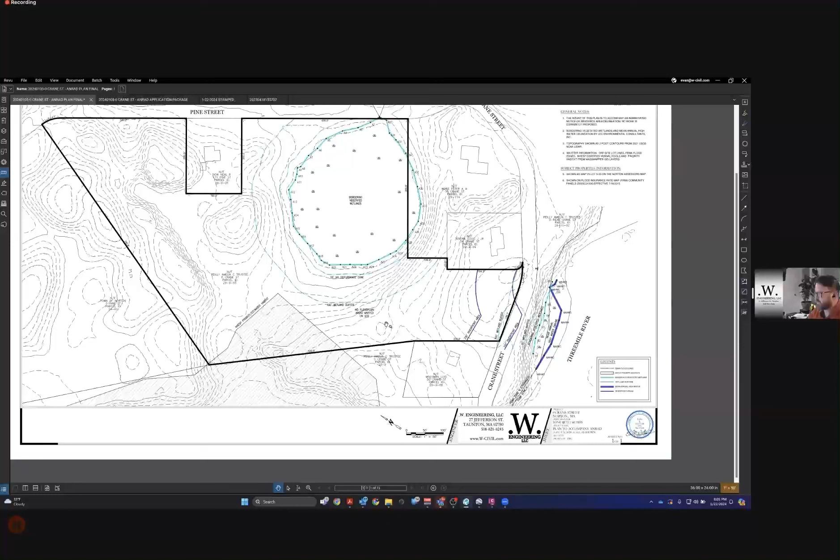Right, okay, so I guess then, I think blazed in is a little inaccurate. And I'm sorry to step on Neil.

Louis Tenor, I live at 54 Crane Street. I am also in the buffer. And I could literally drive my GMC Sierra truck down the path they made.

So how big of the area do you think you guys created? We just moved in with the excavator, and then we opened up an area that was big enough to do the test pits. Okay, I'll take a look at it when I go back out there and give you my two cents. Obviously anything within proximity to resource areas, I usually like to be contacted, so moving forward with any projects here in Norton, just make sure to contact me.

I was under the assumption that the septic permit went through your office when we applied for the perc tests, but I don't remember if it did, but I'll double check. Yeah, because usually I like to know the pathway of where you guys are getting access and just kind of see where all your test pits are.

And then obviously you guys are thinking about putting in septic for the potential houses that are going here. So if you guys are looking at the subsurface conditions too, this is going to be a subdivision project then. So you guys are going to need to get a stormwater permit when you come in with the storm, either separately, you just heard the previous project that we had, they're building the road first.

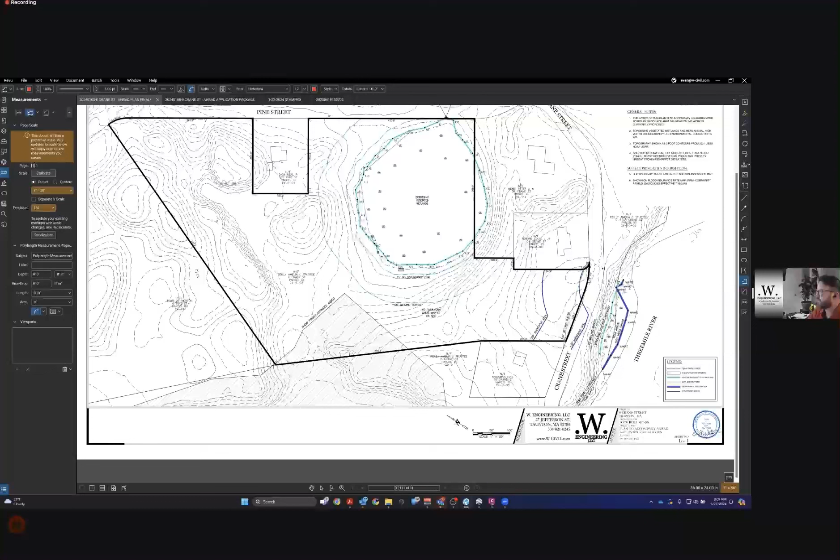Okay, sounds good. So just review for me again, what's the total acreage of the upland in this site? I don't have a number on the total upland, but the total acreage is 11.8 acres. And just guesstimating, it looks like that wetland area could be 3 maybe? I could probably get an area off of here. Oh, that's the wrong tool, but yeah, we'll call it 3 or 4.

All right, any further questions or comments? So if not...

So I guess the specific issues, first we need a number, but also a little more information on the natural heritage classification on part of the site.

Our next meetings are the 12th of February, 26th of February, or the 11th of March. Do you have a preference? I'm all set, it's just a matter of what John wants to do, if he thinks the 12th is enough time to see what he needs to see. No, I think the 12th is sufficient. We're just waiting on that number.

I'm okay with the flags as they are under winter conditions. I just want to see what the site conditions are after a storm too, so it gives me a sense if there might be any other issues or expansion areas we should take into consideration.

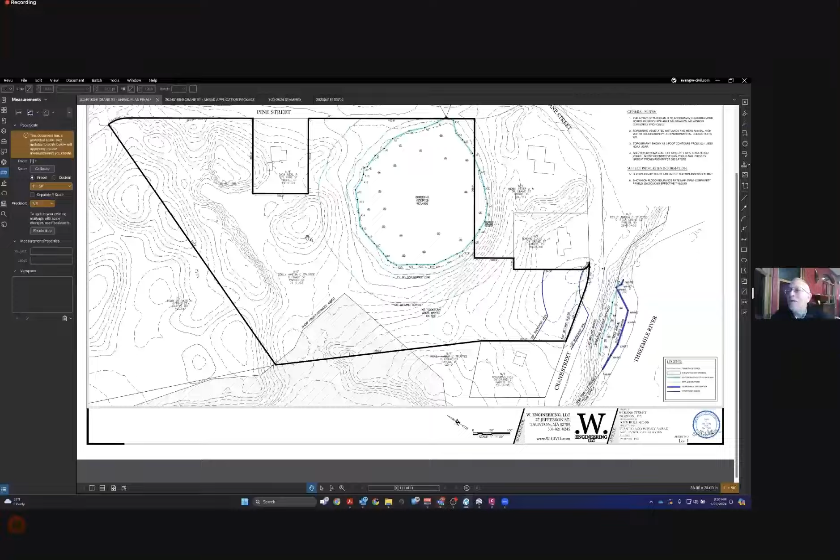Went by too fast, why don't we do it again? So moved. Second. Okay, we have a motion by Dan, seconded by Lisa. Roll call vote: Tama aye, Mark aye, Paxton aye, Lisa aye, Dan aye, and I'll throw in an aye. The motion carries, so we'll talk to you guys again on the 12th of February. Thank you very much, Mr. Chairman, I'll see you on the 12th.

You bet, thank you. Next item on the agenda are continued public hearings. The first items actually go together, file numbers 1129 and 1130, Mansfield Avenue, lots C and D. The applicants are requesting continuance until the 12th of February.

So moved. Second. We have a motion by Dan, seconded by Paxton. Roll call vote, starting with Dan and Paxton: aye, Mark and Tama: aye, Lisa: aye. I'll throw in an aye, the motion carries. Both of those are continued until the 12th of February.

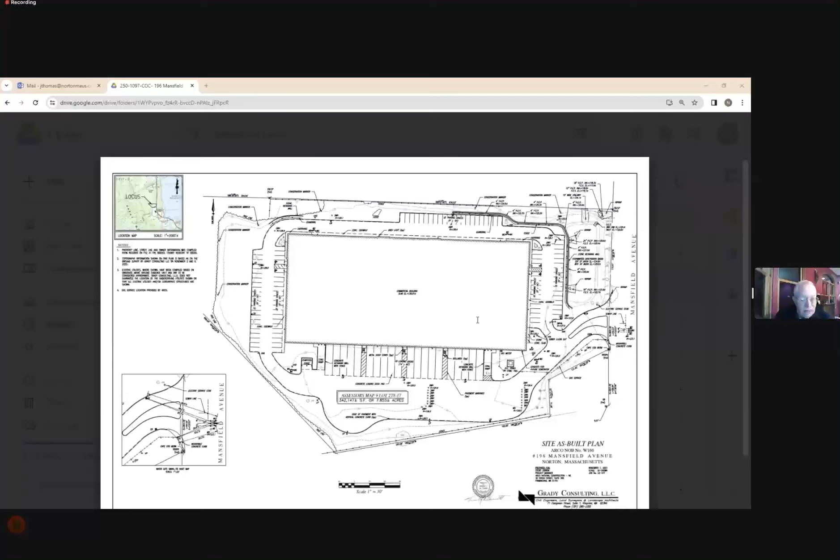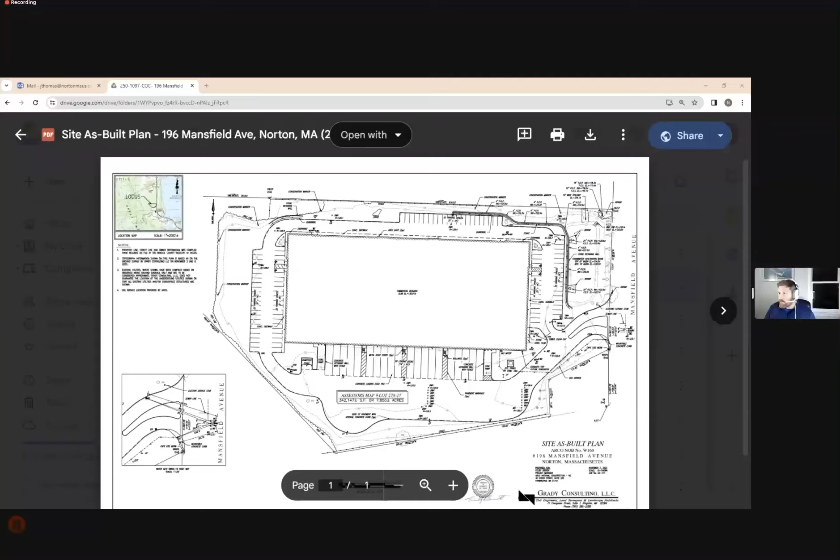All right, sounds like we're in line for a motion. I'll make a motion for 250-1097 to—sorry, it would be to approve and issue the COC. So we have a motion made by Tama, seconded by Lisa.

Roll call vote beginning with Paxton and Dan, aye. Mark and Tama, aye. Lisa, aye. And I'll throw in an aye.

So the motion carries. So all of these places getting rented, it seems like—how many million square feet of warehouse space are being opened up? I asked the developer's consultant if they had a tenant for the property, and I guess they're still working on one. So I don't know, it's an investment I guess. If they're all getting rented, it tells us the economy is still buzzing.

I think we're next at the order of conditions. So 0 West Main Street, the two—I guess they're commercial, or are they residential buildings near Oak Street? Residential housing, to my knowledge.

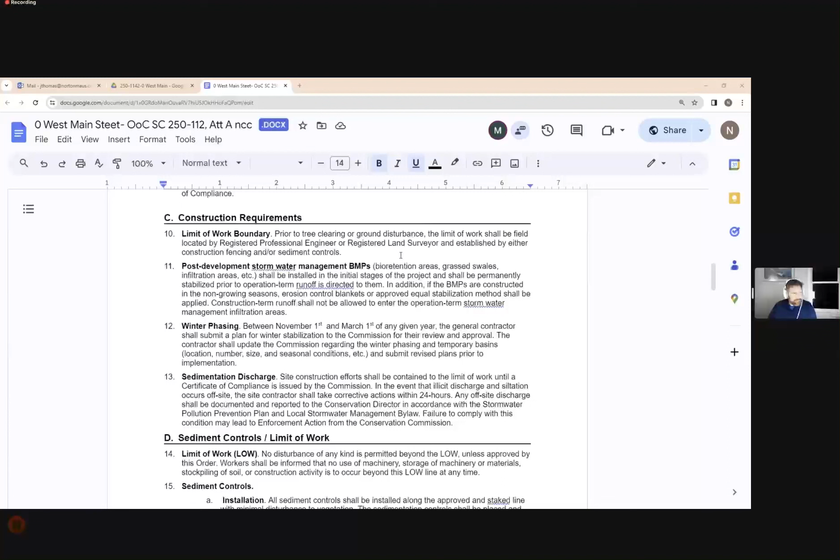Oh, limited. So the term 'the limit of work shall be field'—field located means you're going to locate something by survey that's already there. So the term should be 'field staked,' or 'staked in field.' Typically an engineer is not registered to survey, but a surveyor is.

I don't care if we leave surveyor in there, but the question is: there are engineer firms that do survey, but they obviously need a licensed engineer. So I guess the question is, do you want to just say 'registered land surveyor' since they're the ones usually practicing it? Yeah, and not to be technical, but there's no such thing as RLS in Massachusetts—it's PLS, professional land surveyor. It's always referred to as PLS.

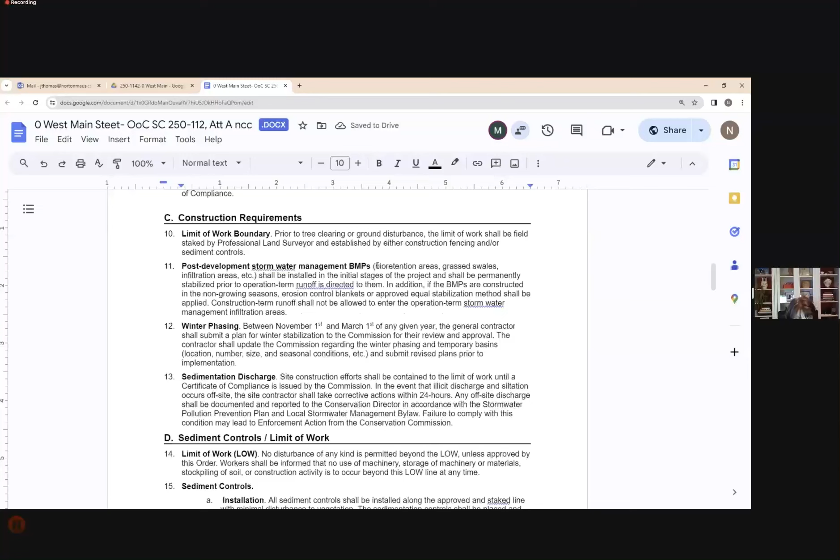Okay. Fourteen—what did I have on there? Fourteen.

14. Why do I have the word 'prohibited' with a question mark? Let me see.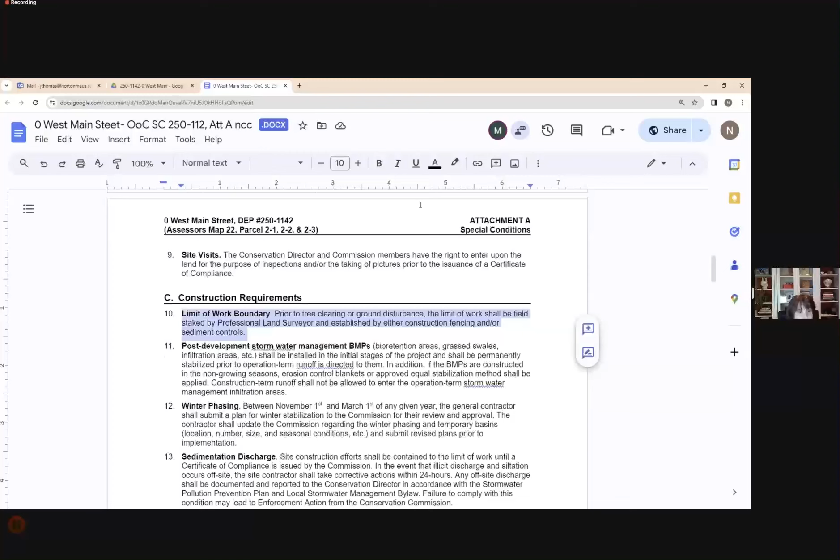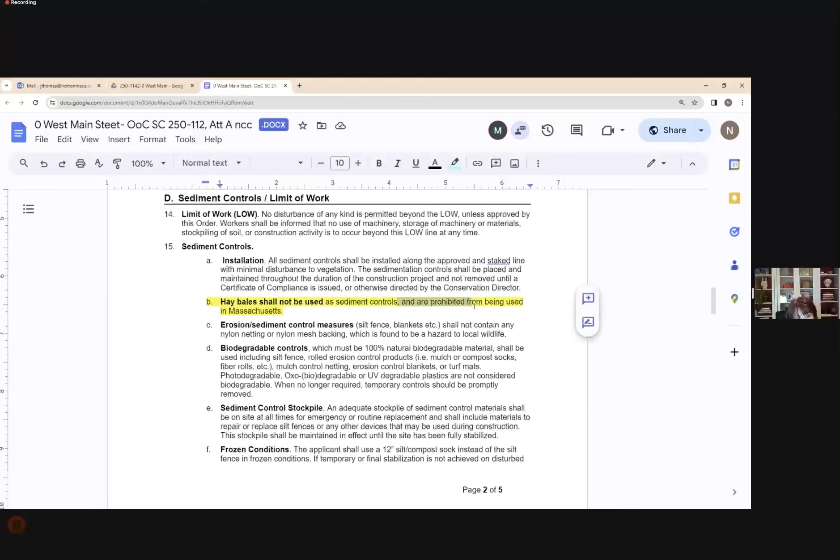15B. Hay bales shall not be used as sediment controls and are prohibited. I would just end it right there - it's really just 'are prohibited.' So you want to say are prohibited, or you would put hay bales are prohibited and shall not be used, one or the other, right Dan P? Since you mentioned my name, you can join hay bales if you want. Okay, there you go, you can join up hay bales, you don't even need a dash. And yes, are prohibited. Okay.

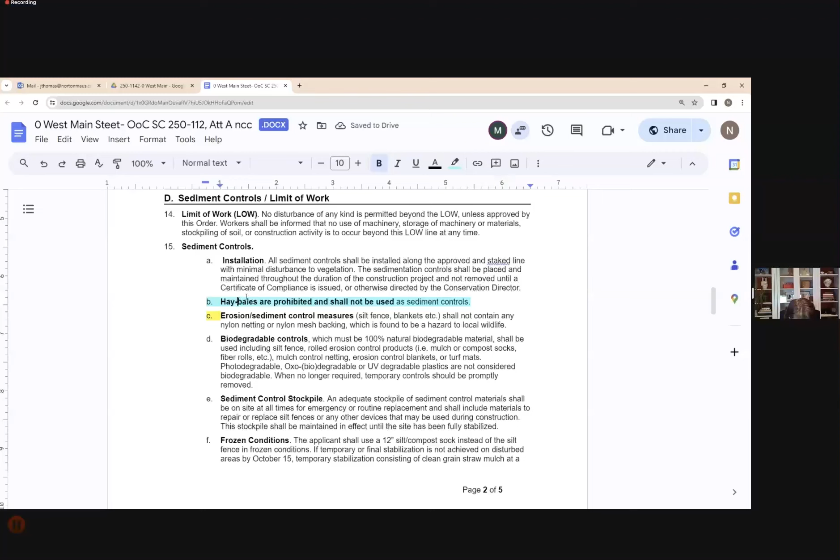16. All right, undercarriages, blah blah blah. I don't know why we say before bringing the equipment onto the site. It should be when they're leaving the site, right? Well, yeah, I don't care what they do before they come in.

Well, I mean, I guess the thing is, are they bringing any sort of untreated things before they enter? I guess that's the question. I mean, yeah, I guess so, when they're leaving, because I don't want to be monitoring that. So, yeah, prior to exiting the site, be the stabilized exit.

Let me just read this. You just say before leaving the site. Yeah, before equipment leaves the site. Oh, no, right, you had it - you said 'or similar method before equipment leaves site,' that's all. In fact, you don't even have to say equipment because you say it earlier. Okay.

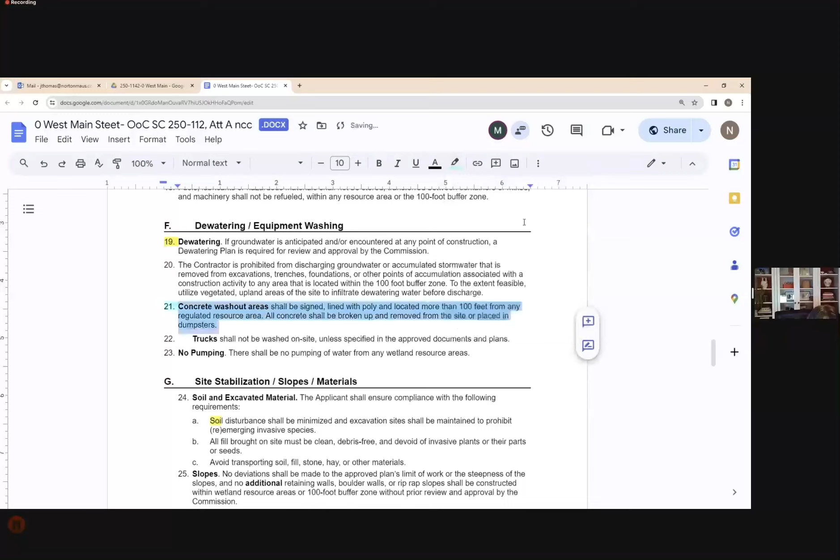We jump down to 32. No sedimentation into wetland, water bodies, or Town of Norton roadways, from discharge pipes. So this has nothing to do with tracking them? No, this basically says that any sort of - there'll be no, because I'm having lots of issues with sedimentation going off sites, so I want to make sure that, for instance, people know that when they have this, they have to monitor their sites. Okay, so this has nothing to do with tracking. Okay, this basically is just a condition saying no sedimentation can go off site.

So like a rainstorm or something, you don't want water going off site. Right, and I want to make that known clearly that it's not okay, even though it should be a known kind of case.

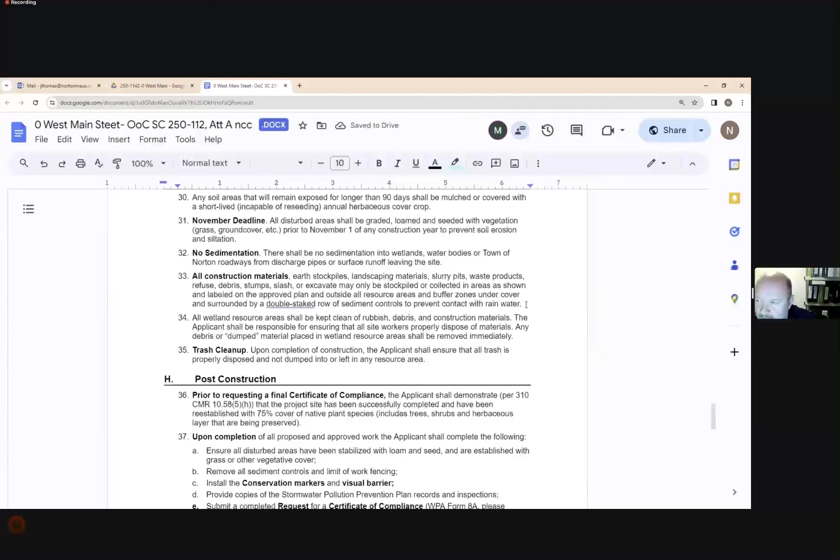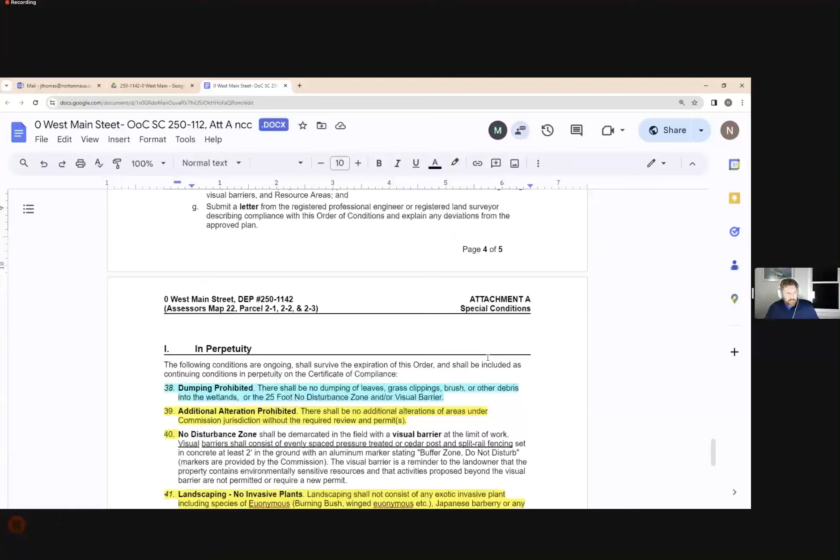Oh, this is more general, Michael. It's going to apply to our general conditions going forward, not just this project. So with the new year, you guys are basically going through the test phase of me trying to cut a lot of the fat out of our old order special conditions. This is kind of a live situation, but we're issuing an order tonight using this template, because I feel it runs a little better since the titles basically tell you what you need to do at certain sections of the project.

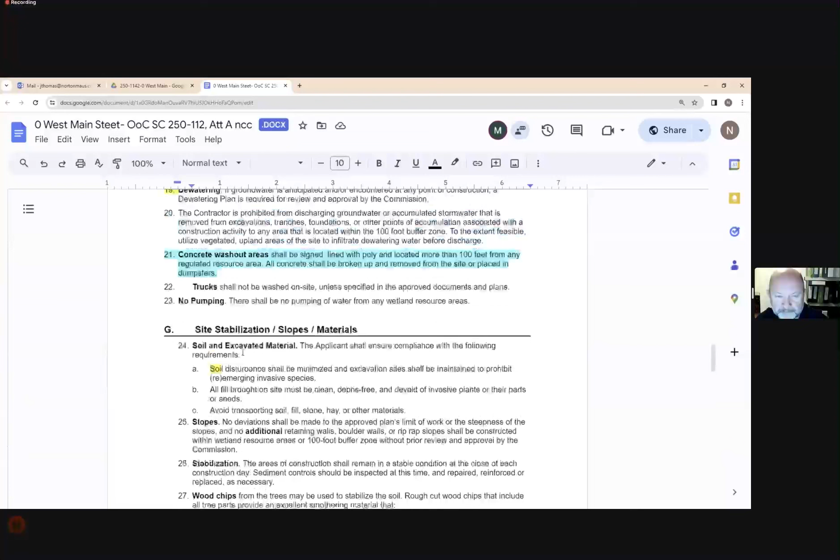So that way, if the contractor, the applicant, or people looking at this project from a field review are wondering what to do under certain circumstances, this has sections you can go to see what you need to be concerned with. I like the new format, John—it's a lot cleaner and easier to follow.

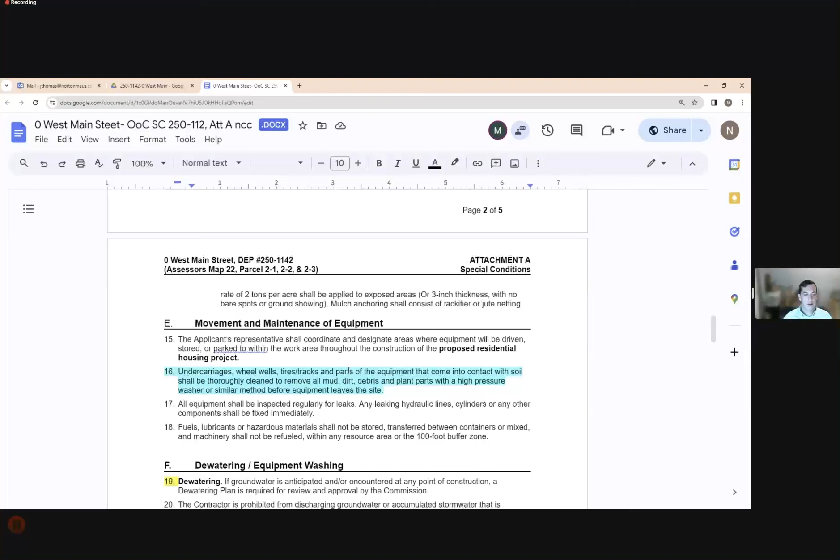What are the findings? So I cut out the findings. That's the question I wanted to ask. I would not do that. Why? Because we have no memory sometimes of why we made a specific decision.

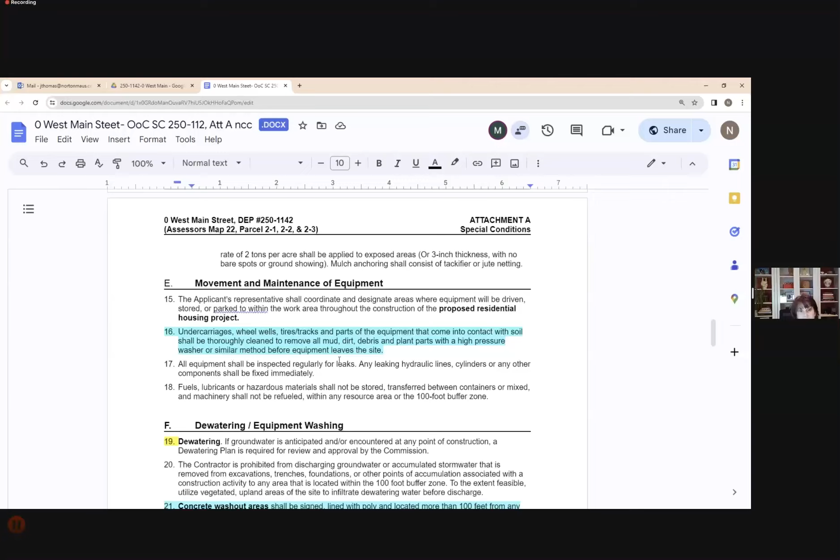For instance, the project that just came before us tonight—how do you do a finding in the notice or order of conditions that says this work only approves the roadways? I'd much rather see that in a sentence up front than try to think back what was approved under this order. Why would we take out findings?

A lot of other commissions don't have findings—some don't have them in their special conditions. That's personally not good enough for me. I find them extremely helpful to go back to at some point and say, oh yes, this is what was included, this is what was excluded, in black and white.

Think about this—the plans are not recorded at the registry of deeds, nor are all the notes on plans. The only thing that's recorded at the registry is this order. I think it's super important to have findings. That's something else we can do—have them record the plan with the order of conditions.

That can cost a boatload. It's not that expensive—only like $150 or something. Yeah, but isn't it priced by plan sheet and size? I have to double check, but I think it's $150 plus. I've recorded condo docs and stuff before. Again, sorry Michael, this is global, not just for your project.

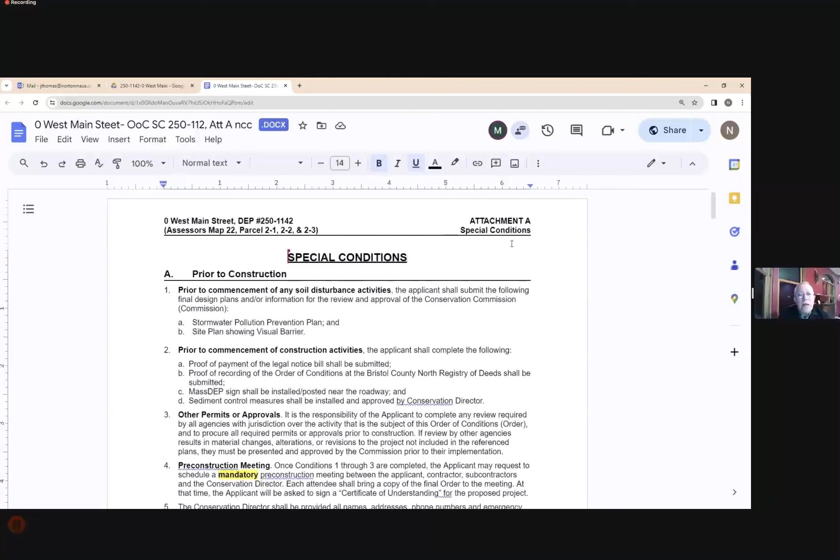Okay, sorry—no, that's okay. So to satisfy this, why couldn't we just add a paragraph labeled findings ahead of the special conditions? Then it's kind of an introductory paragraph just to highlight what's exactly relevant to this project.

I think it's really important because it used to lay out what resource areas were on the site. For instance, if they hadn't determined the flood zone, we would have written that this does not affirm the flood zone if they didn't come forth with any info. I think it's one of the most important parts of an order of condition, personally.

Okay, so then I can enter the findings here with basically all the resource areas from the boilerplate we typically use. The only difference is some of this stuff was a little redundant because a lot of the information's already in the permit application when they come in. But when we fill out the paperwork, the plan information's already there—the final plan, when it was issued, the type of work is usually listed. The only thing that changes is the resource areas and confirming those.

So John, putting my consultant hat on, if I'm doing research on a project and looking at the registry of deeds—again, no plans attached—I can pull up that order and see exactly what was found on the site and exactly what was approved in two sentences. I don't have to go to town hall, I don't have to get the plans. It's extremely useful, I think. Just two sentences, and it can be brief, yes? Yeah, just two.

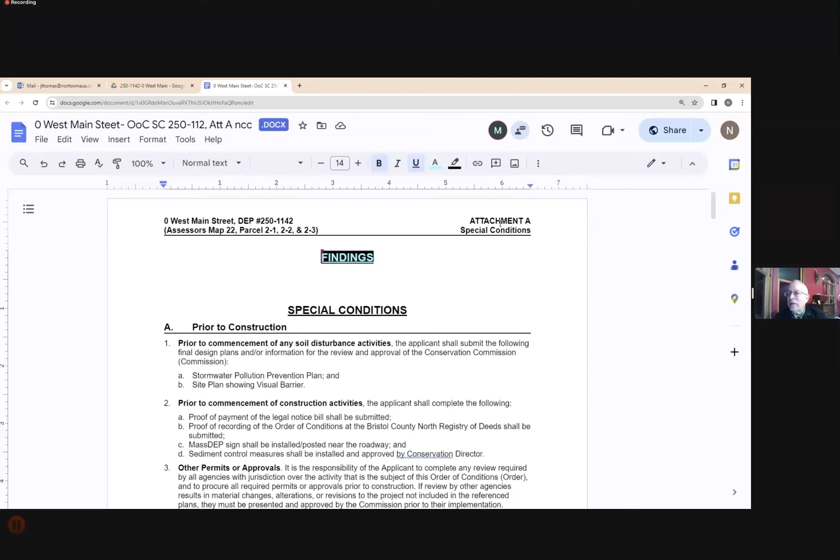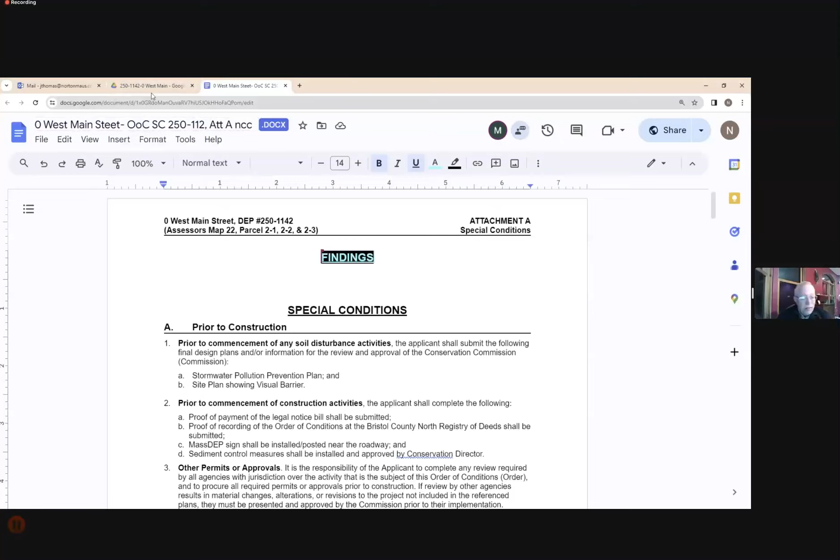Yeah, well, these are things that are already well elucidated in the whole hearing process. So it's just a matter of a simple summary sentence. But it sounds like we may be ready for a motion on this at this point.

I make a motion to issue the order of conditions as discussed for file 250-1142. Second. We have a motion made by Lisa, seconded by Paxton for issuing the order of conditions as discussed for file 1142.

Roll call vote beginning with Lisa and Paxton. Aye. Dan and Mark. Aye. Aye. And Tama? Aye. I'll throw in an aye. The motion carries. Thank you.

Thank you. I have a procedural question. Go ahead.

Should I, for the sake of the minutes, Lisa, do you want me to detail -- right now I have a sentence that says Caressa had professional and grammatical comments on the conditions. I would say organizational and clarity suggestions were decided upon, as discussed.

You don't need to go into depth in each specific condition, Dan. Okay.

So our next item on the agenda is also an order of conditions for file number 250-1132, notice of intent, 6 Mary Jo Road for Mark Mariano. It's a single family house.